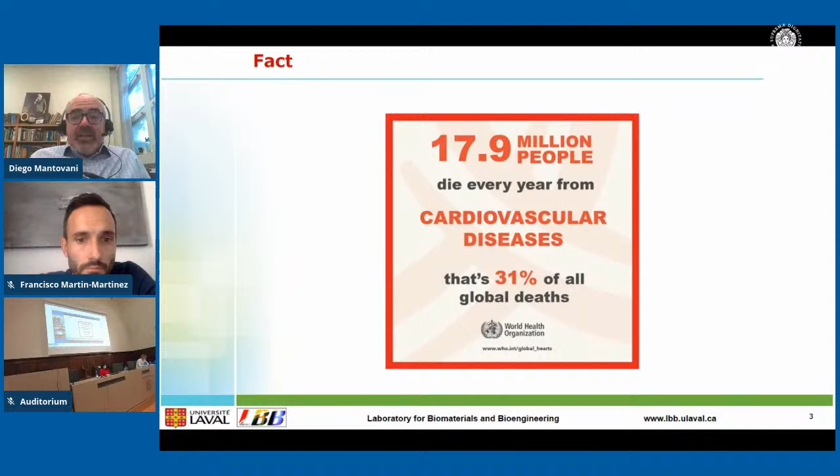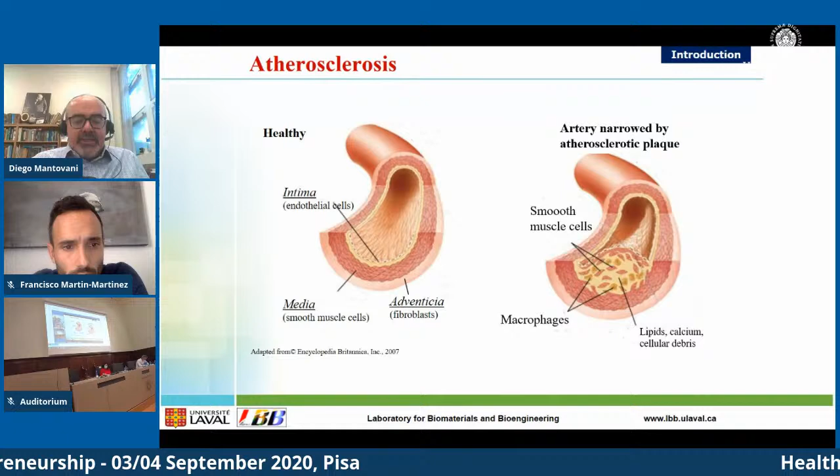Unhappily, aging will bring deterioration and narrowing and the arrival of atherosclerotic plaques. Atherosclerotic plaques are mainly accumulations between the intima and the media, so in the first and second layer of the arteries, of metabolites and especially catabolites. This will induce a rigidification of the arteries and will bring the requirement of pharmacological treatment and later on eventual surgical treatment.

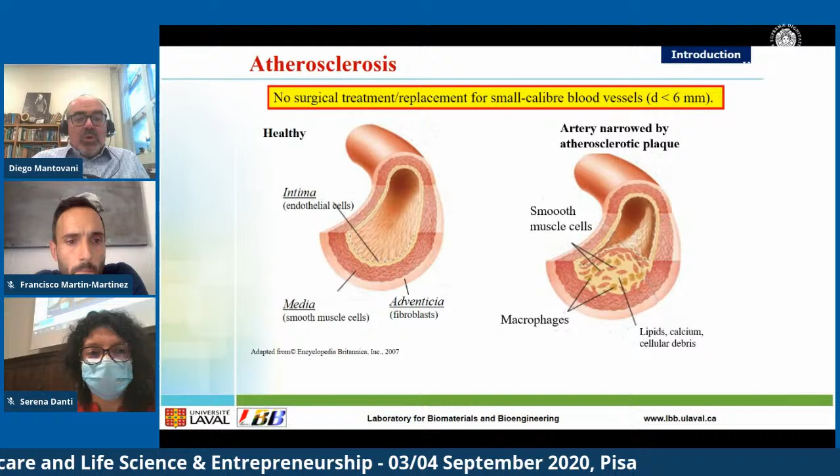It's something that affects roughly 300,000 replacements per year worldwide. So the media is the muscular part of the artery. The intima is, let's say, the moquette and the carpet of the arteries, while the adventitia has more of an anchoring role. So in our lab we address a transversal and converging approach to work from different points of view.

Including biodegradable metals. Our dream for this is to go and correct congenital diseases in newborn babies, even before birth, in order to correct, for example, a vascular or cardiac defect, to limit the progression of atherosclerotic or other problems. We work on regeneration, creating models of vessels and cardiac patches that can be used for validating materials and surfaces that we engineer in our lab.

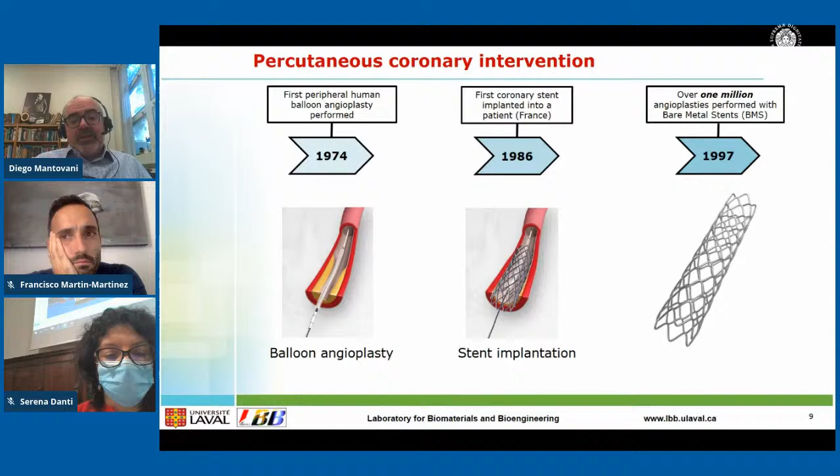Cardiac and vascular stenting is nowadays a very well accepted surgical operation, and the main interest is that it is not run in conventional surgery but intra-arterially, so intravenous, intravascular. However, as I mentioned, there are complications. So basically 1 stent in 3, and in some cases 1 stent in 2, reveal some major injuries at the endothelium after implantation. So there is an inflammatory response to the penetration of the struts inside the wall.

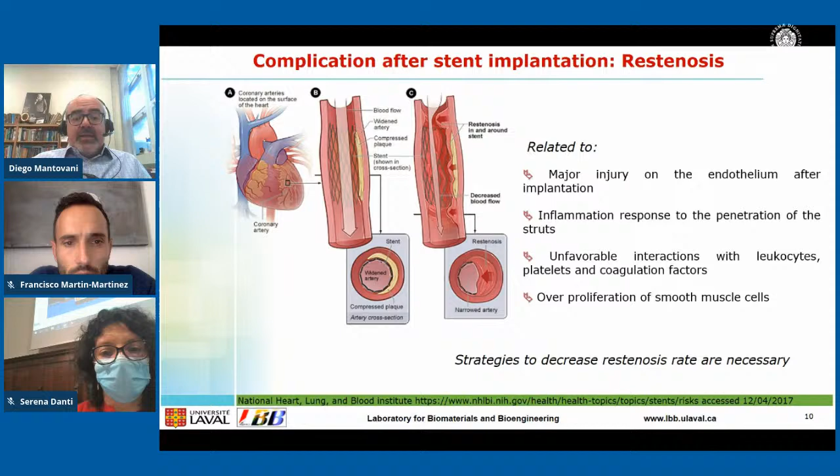As you can see here, the stent, when implanted, will not remain only deposited to the intimal layer, but it will enter and break part of the intima and reach, in general, the media and even sometimes the adventitia. So there is an uncontrolled proliferation of smooth muscle cells called in-stent restenosis. Strategies to decrease this restenosis rate are necessary.

Ten years ago people imagined that just dipping the stent into drugs would have increased the clinical performance rate. But this was not true. The fact of binding to the structures antistenotic molecules like paclitaxel and sirolimus were just big dreams. Today we know that apart from a few cases in a very degenerate vascular bed, meaning very aged patients with a lot of complications and several surgeries already undergone, in general we cannot count on a drug-eluting stent for conventional surgeries.

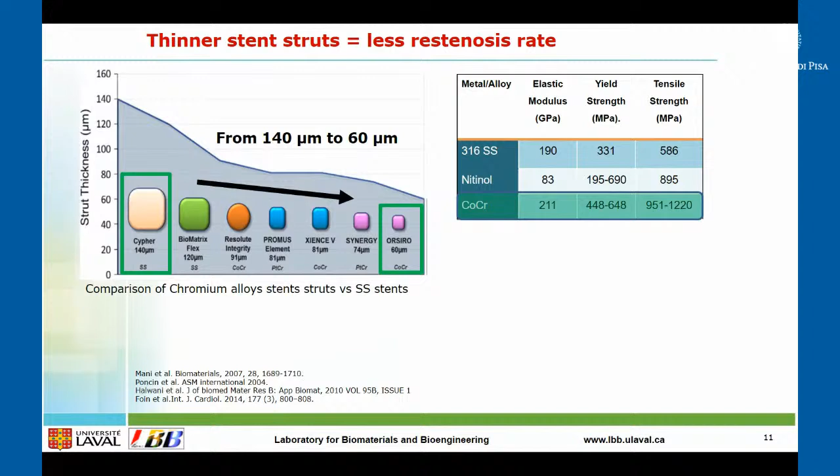So companies, and Abbott is quite innovating in this, decided to explore what happens if we decrease the mass of the stent. Going thinner has become in the last 5 years the main targeted approach. This is also very easy to see in this image where you see the section of the stent going down. The last chrome cobaltum stent is 60 microns in structure. This means if you go down in dimension, in geometry, you need to increase the mechanical properties of the stents. But today, generally, stents are implanted at much less than 140 microns initially planned, and chrome cobaltum is replacing slowly the stainless steel as the gold standard for operation.

However, even with a reduced strut thickness, the restenosis rate decreased from 25 to 15%. This means that one stent of six, one stent of 7, still have a problem. There is also the potential release of cancerogenic ions, nickel and chromium. Chrome cobaltum is an alloy with 30 to 40% chromium.

So drug-eluting stents became a reality around 2005. But by 2015 it was evident that major complications like late in-stent restenosis arrive. In other words, the fact of releasing paclitaxel, sirolimus, and derivatives for years compromises the homeostasis of the entire organism and results in an unbalanced blood coagulation cascade. So the critical compromise in endothelium recovery was due to non-specific drug release, and the idea is how can we improve the performance of the devices.

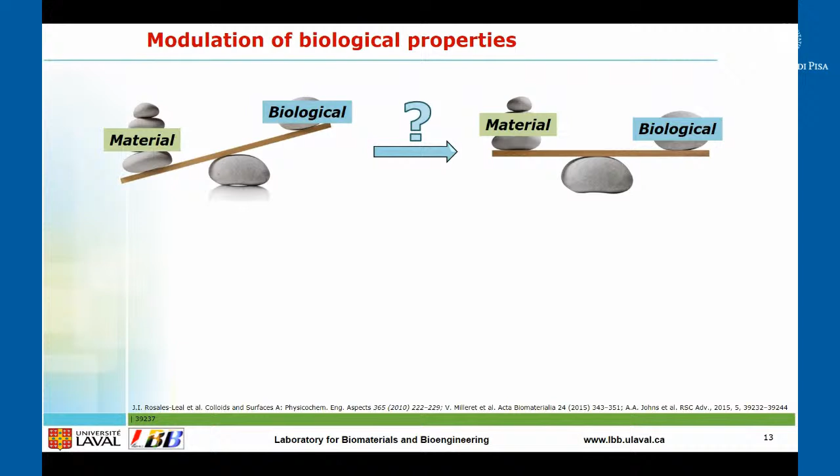This project results from a joint connection between cardiac surgeons in Paris, Abbott Research Division in the US, our lab, and a few other labs in Paris and Belgium. The idea was brought mainly by our cardiac surgeons: let's work on the equilibrium between materials and biology.

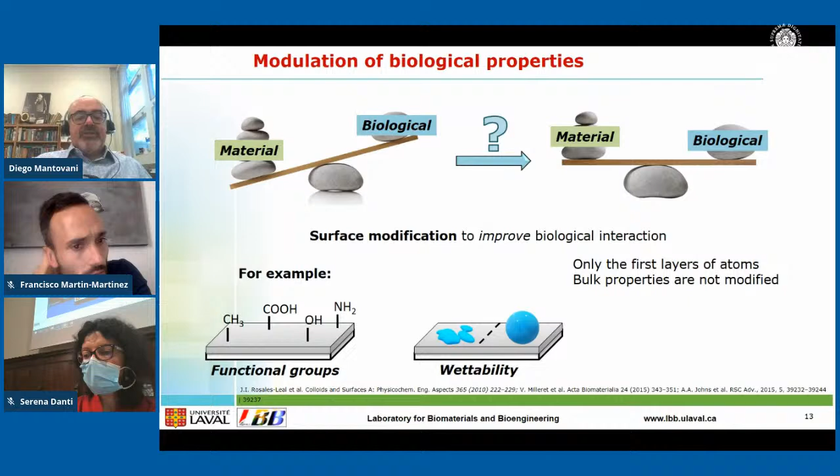Surface modification is a proven, interesting approach to modify the first layer of atoms without touching or disturbing the bulk properties. For example, you can imagine on a surface, generally done with polymers, to functionalize the surface, changing the wettability and finally affecting the surface finishing.

So the clinicians brought these 3 blocks. We need a cardiovascular device. The future stent should be anti-inflammatory, pro-endothelialization, and antithrombotic. So our idea, our solution, was why not graft bioactive molecules to enhance the device integration.

This is not very much different from what our colleagues presented earlier this morning. Very schematically, our approach was to take L605, so chrome cobaltum, medical grade, used for fabrication of millions of stents around the globe in recent years, and deposit a coating, then functionalize the coatings, finally revealing cracks in the coatings when the material is deployed.

So in this project, one of the innovative approaches was to challenge the use of a polymeric layer. If you take, for example, Abbott, they have on the market the Xience stent. This is a stent just coated with a very thin fluorocarbon layer to avoid adhesion and proliferation of smooth muscle cells. In this work, we wanted to bypass, to limit the coating presence.

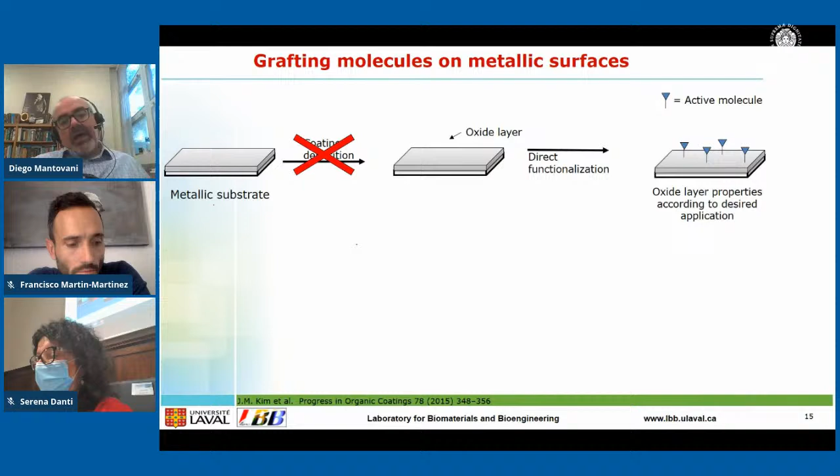Our approach was to explore direct functionalization by plasma, and this turned out to be very original. No one had ever published or reported work on direct functionalization. Direct means taking the metal, putting it in a plasma reactor, and creating functionalization groups by plasma treatment. So depending on the gas used in the plasma, you can fix carboxyl groups, amine groups, or other groups.

So functional groups are to be used as an anchoring point for biomolecule grafting. In our case, in the following of my presentation, I will mainly focus on amine groups. So when you have a surface with amine groups and you want to attach bioactive molecules, in a few moments I will tell you which was the bright idea brought by clinicians for the new bioactive molecules. Then you need different strategies, but mainly linking arms.

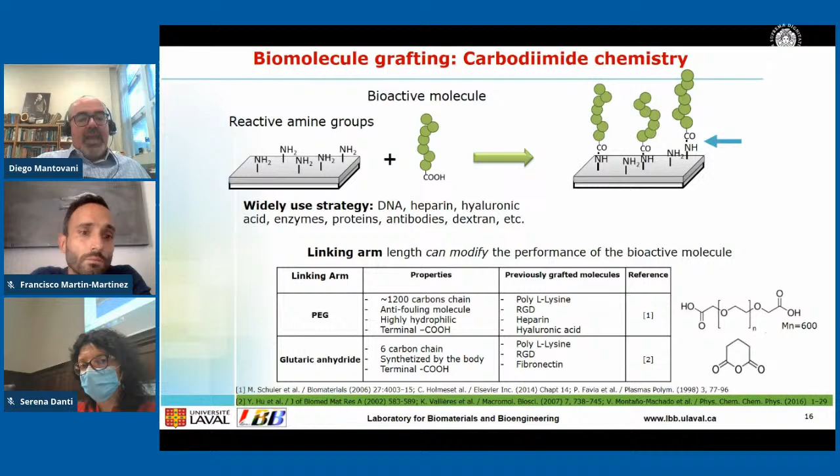So in general, you can see works in the literature with anchoring to functional groups: DNA, heparin, hyaluronic acid, enzymes, proteins, antibodies. Linking arms are used because you can modify the performance of the bioactive molecules, depending on the availability of the molecules to the biological surrounding environment during implantation, leading to different results. In this work, we explored two linking arms: PEG with 1200 carbon chains, and glutaric anhydride with 6 carbon chains. The idea was to let the molecules be available to the bloodstream, to cell colonization, and to extracellular matrix protein interactions.

What I present in this slide mainly came from the clinicians' point of view. They selected a biomolecule of interest, which is in the family of PECAM. These are platelet endothelial cell adhesion molecules, or cluster of differentiation 31. The idea was to focus on these molecules that are very small, because they are 6 to 12 amino acid sequences.

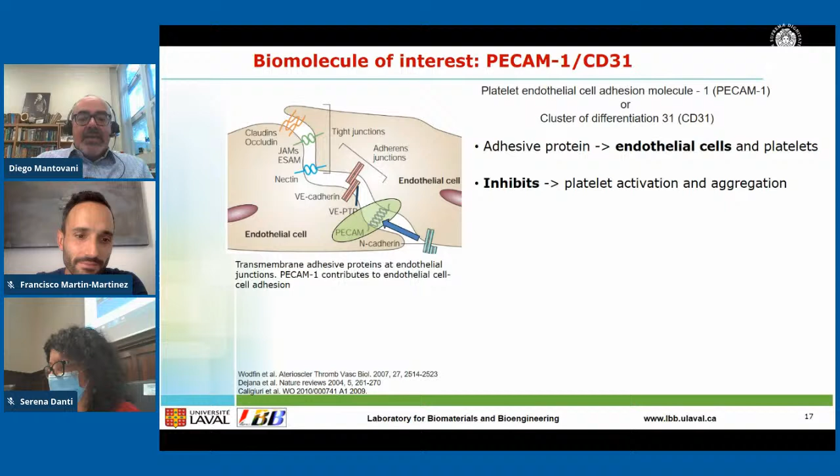So let's say very interesting adhesive proteins, endothelial cell and platelet specific. The idea of this PECAM-1 was to inhibit platelet activity and aggregation, and finally clinicians at Hôpital Bichat in the north of Paris patented a synthetic short chain that they invented, called P8RI. It's a small sequence of 8 amino acids supposed to be responsible for attracting endothelial cells very rapidly to the surface. By grafting these very short peptides, we expect to generate a biomimetic surface to improve chrome cobalt bare metal stent performance.

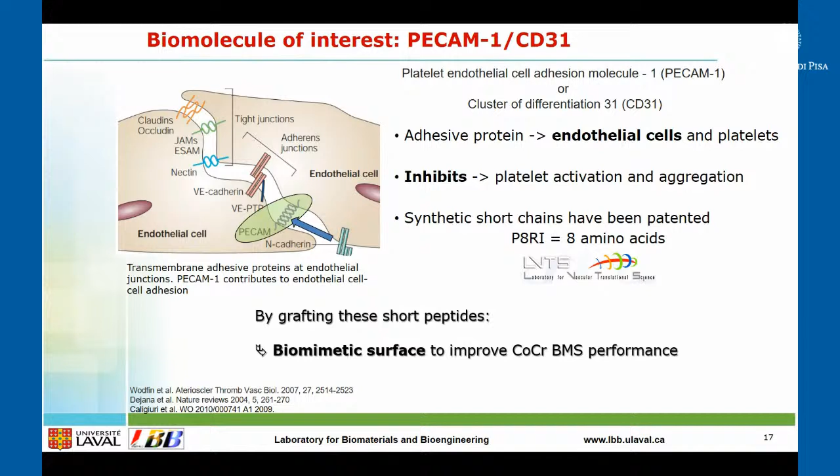So the idea that we developed was: take the stent, modify it in plasma. We had a company develop a very interesting plasma reactor in which you can treat up to 18 stents at the same time, like a revolver bullet support, in the presence of nitrogen-containing gas in order to create amine groups on the surface.

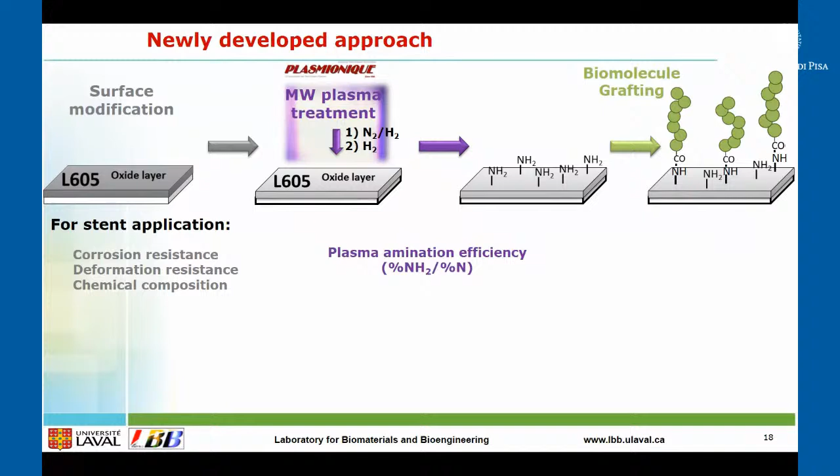So for stent applications, the idea was to achieve corrosion resistance, deformation resistance, and chemically controlled composition. The plasma amination efficiency was the criteria for plasma treatment success, and finally the feasibility to graft molecules with different linking arms, expecting different biological performances, are the three targets expected from the work.

About the feasibility of the approach — this was published a couple of years ago — what is interesting is that, to the best of our knowledge, this is the first time a metal was successfully functionalized in a plasma reactor. Plasmas are generally devoted, especially low vacuum plasmas, mainly to polymers.

Finally, surface optimization — basically this is optimization of the linking arm — and finally the grafting work, now published in Biointerfaces. So the methodology was the following. I'll go fast; if you are interested, I can share the results with you very easily.

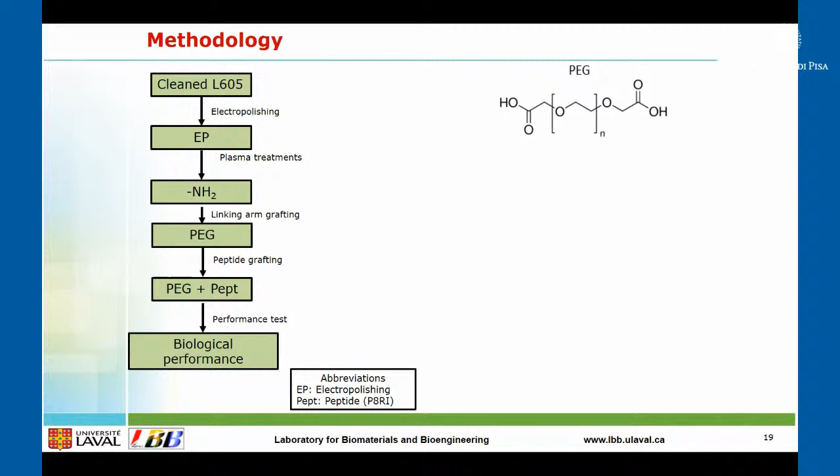The idea was to start with a cleaned stent, electropolish it, and in order to engineer the oxide layer a bit, finally graft amine groups. From the amine groups we explore the PEG and the peptide, then assess the biological performances. The peptide, P8RI, was patented by a company that is now working at clinical level on this project. XPS and high resolution immunostaining fluorescence were used to assess and validate the protocol.

So why polishing? I'll give you a very short history here, but this was two years of research carried out in a teamwork effort, in order to understand: should we remove completely the oxide layer, or how much of the oxide layer should we leave, and what will be the best roughness?

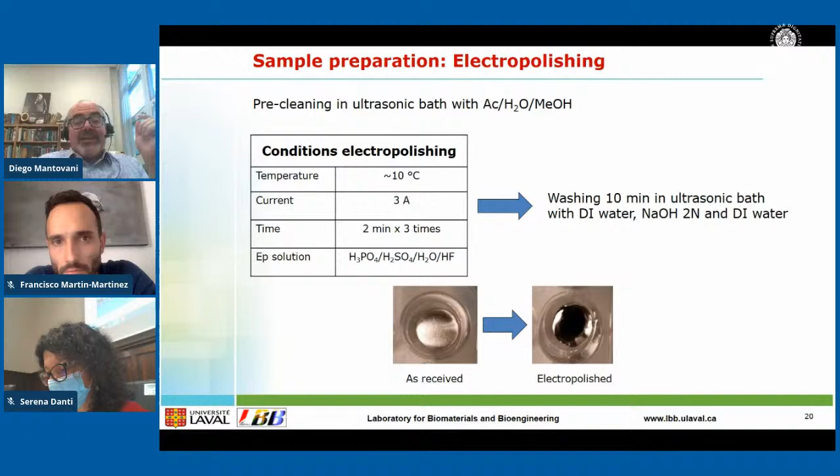One should know that stents for cardiac, vascular, and neurological applications are generally surface treated in order to get a roughness of 4 to 6 nanometers. So the plasma reactor is this one.

The proof of feasibility was done in a conventional plasma reactor, and then a more targeted plasma reactor was developed with 18 stents that can be positioned inside.

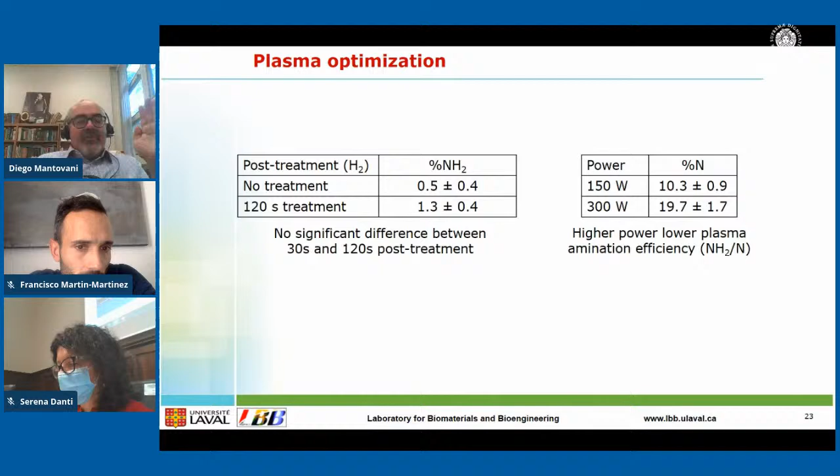Amination was done with a different condition, basically in a post-treatment, and the plasma optimization arrived to a value of 10 to 20% of nitrogen, which results in around 1.5% of amine group. This is more than enough. Don't think that we need 100% of amine group on the surface.

So the homogeneity of the stent functionalization was assessed - the top part, the bottom part, and the central part - and basically this was confirmed.

We used bromine in order to derivatize the amine group presence, and so to be able to assess the aminization capacity of the process.

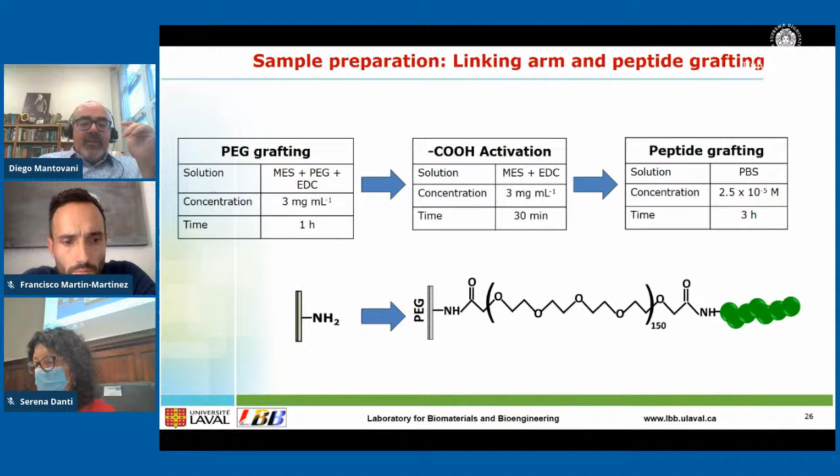Finally, two different linking arms were used for connecting the peptide graft. So this is the PEG long chain, and the glutaric acid was second.

In general, there is no nitrogen after electropolishing. This means that the nitrogen on the surface comes mainly from the plasma treatment.

Finally, the PEG is attached, and the PEG peptide is there. This is an interesting table because you can see the evolution of what you bring to the surface, and you can notice that the oxygen and carbon presence increase during the PEG grafting and the peptide grafting.

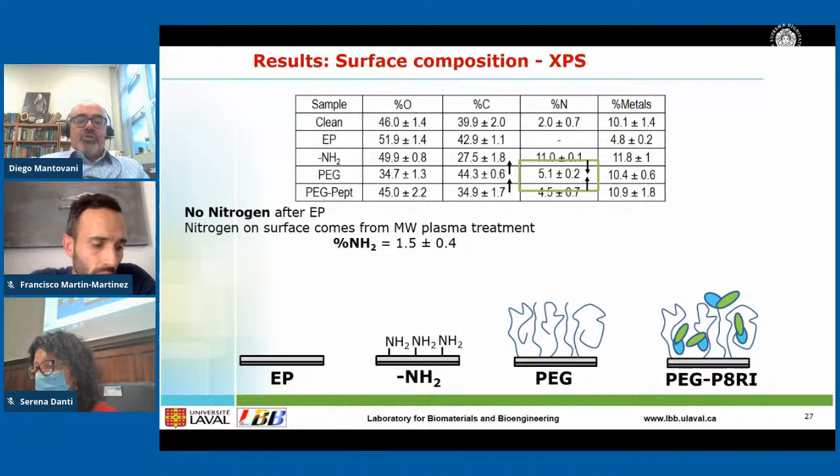What is important is to see that basically 5% of nitrogen was the targeted approach.

Then some in vitro tests in order to assess in the lab, especially with endothelial cells, were carried out. So the phenotype, multiplex analysis of sub-inflammatory factors, and some distribution of endothelial cells by immunocytofluorescence was carried out.

So this is the short chain with glutaric acid, and this is the long chain linking arm with PEG. I think you already captured the potential of both.

And these are the in vitro results of endothelial cell phenotypes. Basically the vascular cell adhesion molecule VCAM1 decreased, and this means it mediates the adhesion of platelets to endothelium, which is very positive for us.

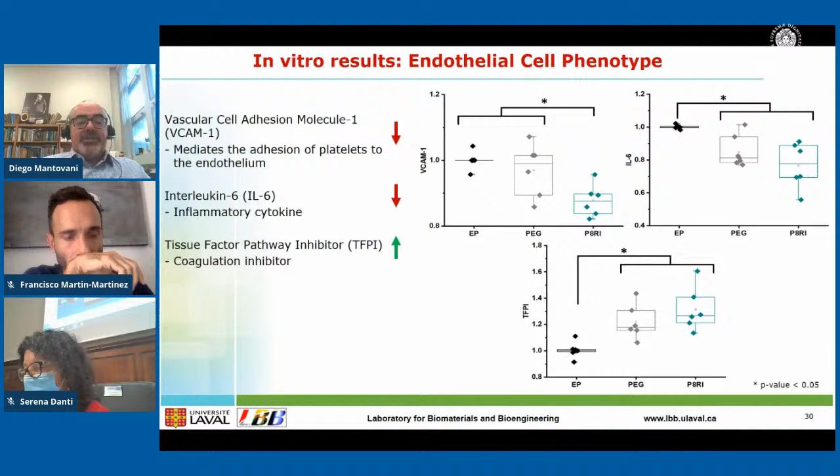Interleukin 6 decreased, meaning basically the surface is less inflammatory, and the tissue factor pathway inhibitor TFPI increased - this is a coagulation inhibitor. These are three factors quite considered by cardiac surgeons.

So in general, the surface after the grafting is more anti-inflammatory and anti-thrombotic than electropolish. So there is a synergistic effect between the PEG and P8RI.

I suspected this before doing the experiment - our expectation was that the more freedom was given to the peptide, the higher would be the biological performance.

This is a result of electropolish, meaning no PEG, no peptide. This is PEG coating, and this is PEG and peptide.

We are looking at endothelial cells at 1, 3, and 7 days. Basically, the P8RI grafting increases endothelial cell viability and anastomotic integrity.

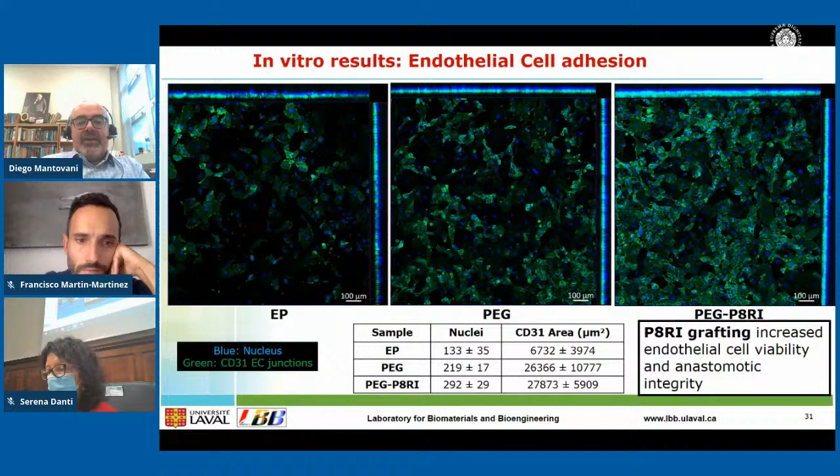And then we transferred this to a commercial cardiovascular device. So 80 stents were provided by Abbott, which was a good partner in this project, and then it started to become a bit more complex, because what I presented to you up to now was done mainly on flat surfaces.

All the processes were optimized on flat surfaces. And now you have in your hands an 80 micron structure stent, 3 centimeters long and 1.7 millimeters in diameter, and when expanded maybe 3.5, so 1.7 to 3.5.

So very tiny devices, very complicated to manipulate. Can you imagine doing XPS? Can you imagine doing contact angle, surface profilometry? Everything becomes more complex. And when the challenge becomes high, you need to use very advanced techniques.

So we went to TOF SIMS imaging, and this is an image obtained on 500 square micrometers and 150, and what you see in yellow is basically the presence of P8RI on the stent structures, because actually Abbott wanted to be convinced that the peptide was really grafted.

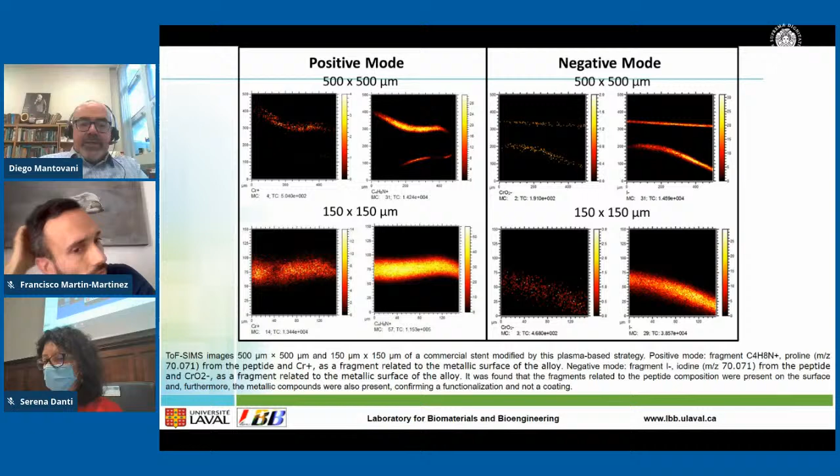This is a positive and negative mode for TOF SIMS imaging of a commercial stent modified by the plasma-based strategy, and you can see in general how clearly the yellow segments show the presence of the peptide.

And then we went in vivo, in a pig model, and we compared 3 stents: Multilink, which is a bare metal stent with nothing attached; Xience, which is a drug-eluting stent coated with fluorocarbon and grafted with everolimus; and finally a PEG P8RI stent.

This was a very interesting approach, and I wanted to spend a minute on this. When you test a new strategy like the PEG P8RI grafting molecules without acid and no wet chemistry, then you really need to find the positive control and negative control.

And basically this is something that a clinician will not test - a new device, a new strategy, without comparing with what exists and what they use, and basically what they know works well and what they know works less well.

Bare metal stent today for a middle-aged patient is considered the gold standard for rapid endothelialization. Drug-eluting stent, for the same patient, is considered a negative control: no stenosis within 6 months, but after 10 years, completely unbalanced hemostasis. So comparing a bare metal stent that doesn't have any peptides, molecules, or delivery system, with a drug-eluting stent that does release a drug, we know that at medium term, 5 to 10 years, complications will arise.

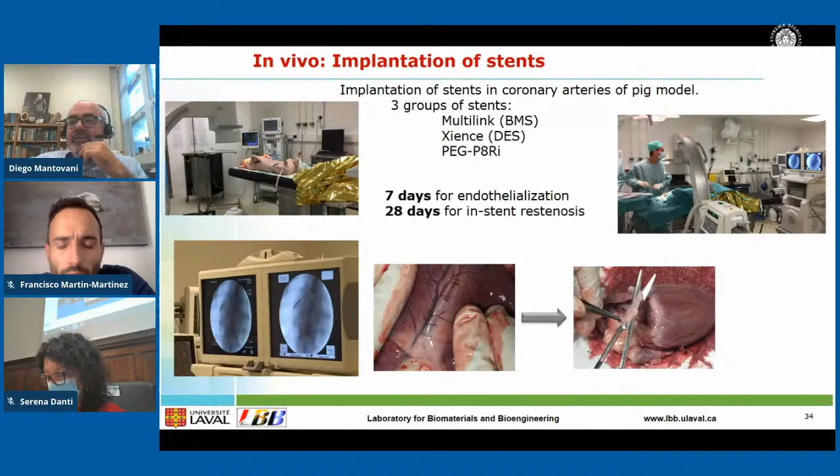This is the stent once implanted in a pig, and this is during explantation, and finally we collect materials for further analysis.

And this is the very interesting results. You have a bare metal stent, a drug-eluting stent, and here the peptide-grafted stent. Let's look at this endothelialization at 7 days, and this is an OCT image of the stented artery showing how patent it remains right after.

Clinicians were very interested because of the very high endothelialization on this stent compared to drug-eluting stent. Drug-eluting stents, we know, have slow endothelialization, but bare metal stent is supposed to be fast, though there is some presence of coagulation.

Here on the peptide, you just see endothelial cells and basically some platelets, but not activated—here they are not spread. And the presence of the eluting drug, everolimus, shows that here too.

So the peptide generates the same response as a drug-eluting stent, but with the rapid endothelialization generally observed with a bare metal stent.

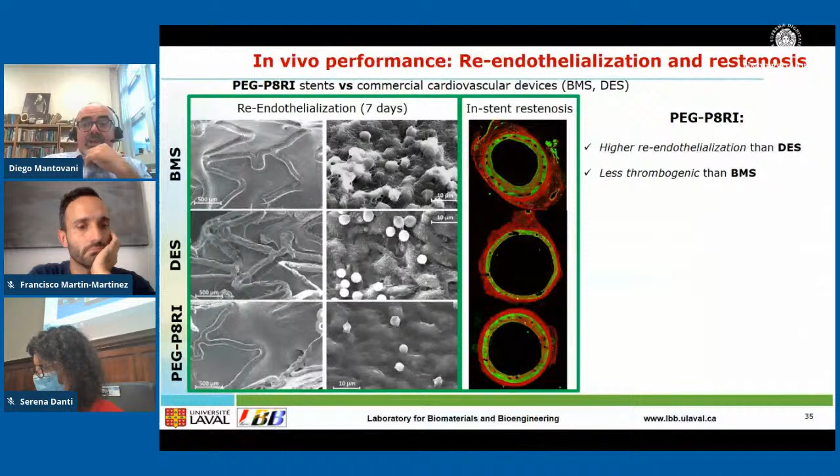This is an OCT image showing the patency, and you see that for drug-eluting stent it's not bad at all, but the best is really for the peptide-coated stent, showing less in-stent restenosis compared to bare metal stent.

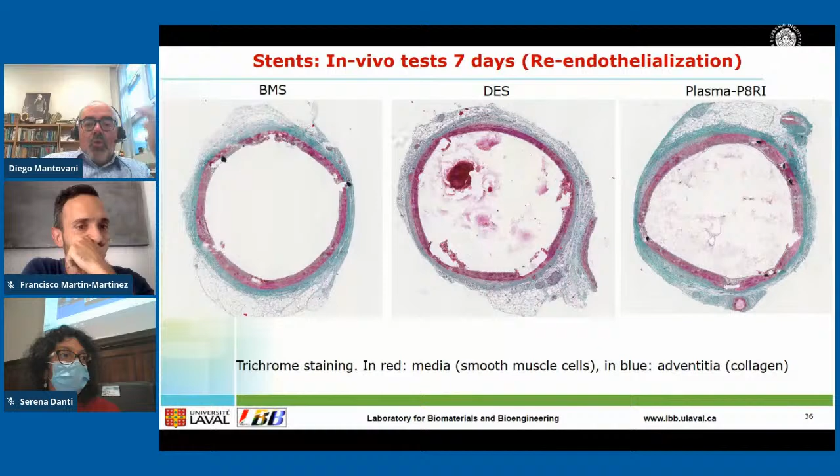And this is the in vivo test 7 days after. You can see bare metal stent has basically no coagulation, some coagulation here in drug-eluting stent, and finally the plasma peptide-coated stent is quite clean. So in conclusion, surface modification can improve biological performance without compromising material properties.

The best amination efficiency was observed while maintaining corrosion and deformation resistance.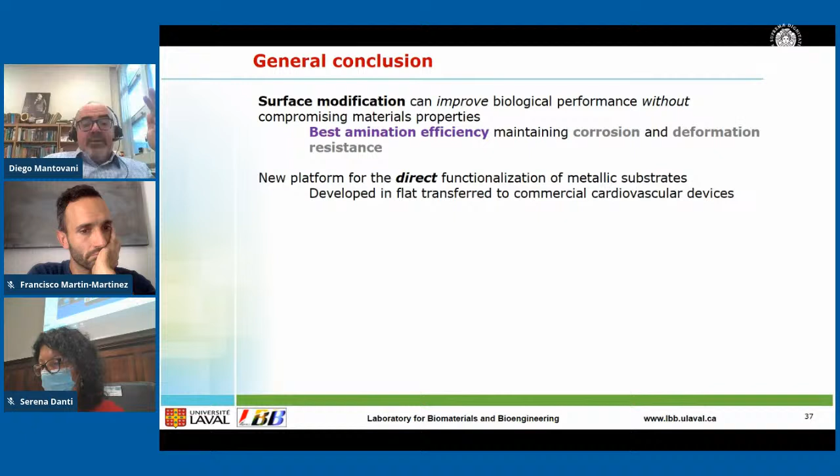This developed a new platform for the direct functionalization of metallic substrates, and the development was transferred in a flat format to commercial cardiovascular devices and stents. This plasma-based strategy, when coupled with CD31 peptides, improved both in vitro and in vivo biological performances.

And when compared to commercial cardiovascular devices, this peptide strategy includes higher re-endothelialization than drug-eluting stents and antithrombotic activity, especially compared to bare metal stent, and finally a decrease in stent restenosis when compared to bare metal stent.

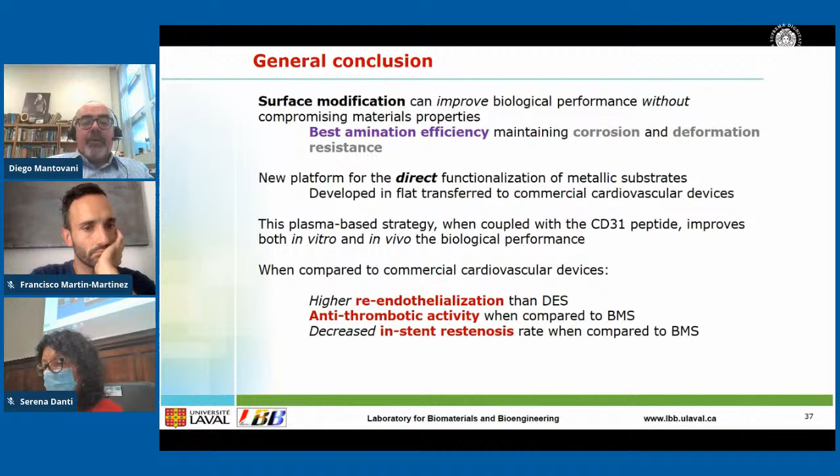Today, this project is under development, and Abbott invested in a small spin-off with 12 people working on it, carrying out longer animal studies and starting preclinical analysis. So we have a good expectation that in 2-3 years, this project and these results will arrive at a product on the market.

A number of activities are ongoing transversally, including transferring these peptide grafting techniques to balloon angioplasty, for example, or other metallic devices. Two of our past PhD students are now involved in the companies, and this is also an interesting result for professors like me.

Clinicians are very excited to have been introduced to TOF-SIMS and this kind of analysis, while companies are generally really prudent with this kind of work and project.

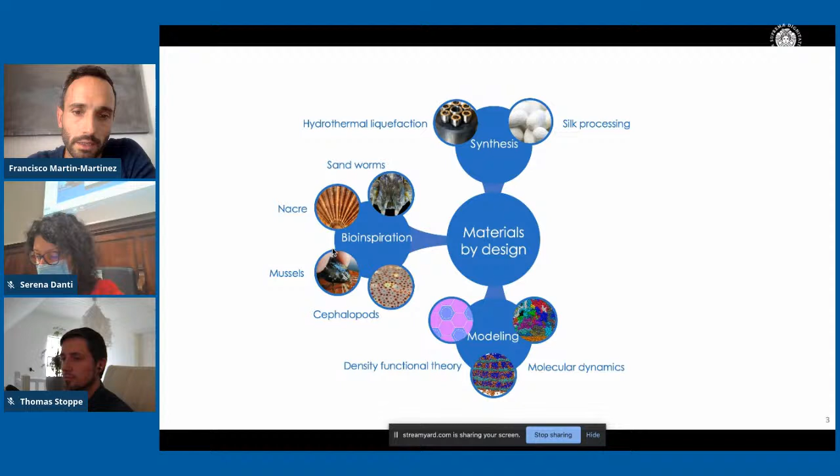In particular, I've worked with hydrothermal liquefaction of biomass, but also with silk processing. And there is something in common to all these things, which is that we always have some kind of bio-inspiration. We try to mimic nature, because at the end of the day, any material, any technology we can develop has already been thought and developed by nature. The first thing we need to do is learn from nature how to solve that challenge.

And then that, of course, applies to different applications. I'm going to talk about some of them connected to nanocomposites, soft robotics, or redox flow, vanadium redox flow batteries.

So let's focus now on this part of the modeling within materials by design. The challenge with modeling comes basically because of the length scale and time scale when you are modeling materials. That implies some implicit limitations that make us work either in the quantum mechanics field, in which we can indeed include electrons in our calculations and describe the system very appropriately, but in that scenario we cannot afford very large systems, and the time scales are also very short.

We can then go also into molecular dynamics. Basically, what we do is forget about the electrons, and then we say, all right, I'm going to consider that my atoms are just spheres that are interacting with another sphere through some kind of potential, which is called a force field. So this very simplistic, more classical approach to the description of molecules and materials is what we do for molecular dynamics—still very accurate, still atomistic, in which we can now afford a bit larger systems.

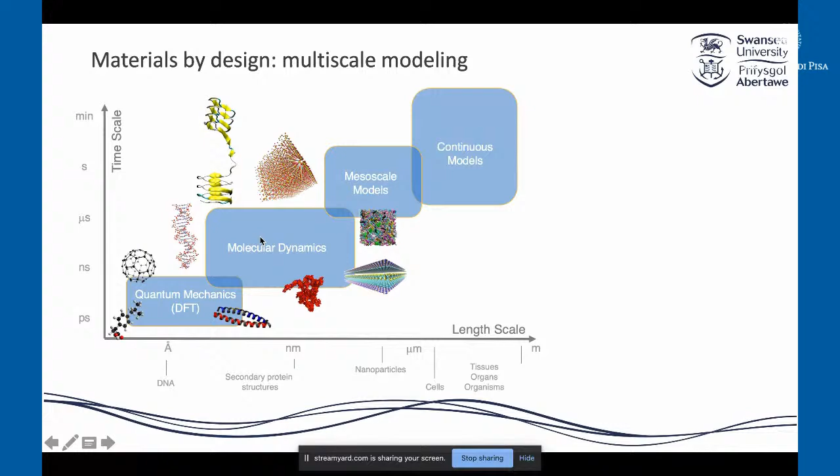This is very commonly used for the design of proteins, for larger scale nanomaterials, even for concrete, asphalt, and materials of this scale. Now there are, of course, some other modeling approaches at different scales, mostly continuous models when we work with finite elements—I have not worked on that scale. The biggest challenge in between these continuous finite element models and atomistic modeling is this mesoscale, which is some kind of frontier where we are still working on how to bridge this gap into the models. And now what I'm mostly interested in is how we can accelerate all of this by using machine learning techniques.

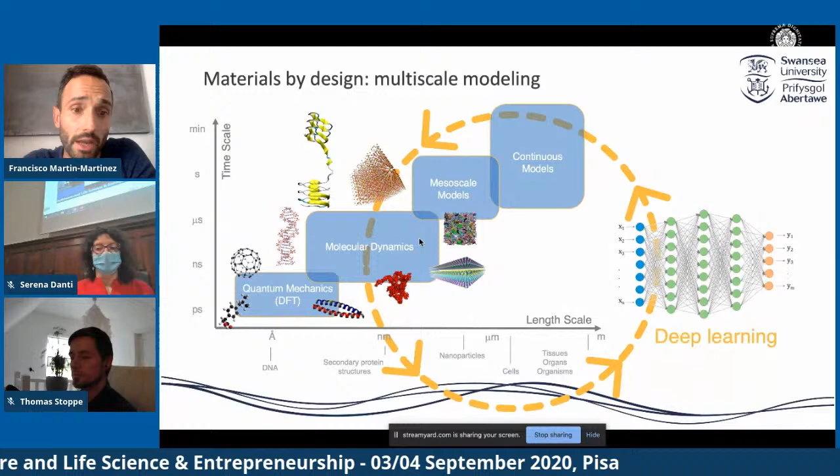So how can we use deep learning to speed up simulations in molecular dynamics, as well as electronic structure calculations in quantum mechanics. That, of course, isn't something you do on your laptop. We mostly work with Supercomputing Wales, the supercomputing center of Wales, of which Swansea is one of the partners, as well as with Google Cloud, where we can perform these calculations not on our own hardware, but in the cloud with Google.

Now the other part is inspiration. By inspiration, I mean while I was at MIT I worked on different projects with many people, trying to mimic nature to produce, for instance, better adhesives, mimicking how mussel threads adhere to stones in many different circumstances. To achieve that, we mimicked the catechol-rich proteins, modeling a polydopamine catechol-enhanced polymer that has very good adhesive properties.

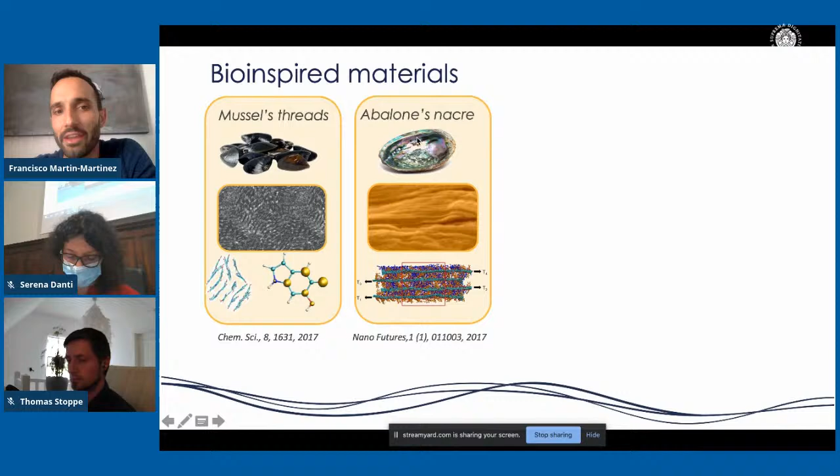We then used that polydopamine to produce a graphene oxide polydopamine composite, increasing the mechanical performance of graphene oxide paper by mimicking the structure of nacre from abalone seashells. So these are two examples of bio-inspired materials.

We also worked on mimicking and producing materials that shrink or expand upon changes in pH or temperature, mimicking a protein found in the jaw of this beautiful sea worm, Nereis virens. We did modeling to capture the coordination of metals with different terminations in the protein, and also to mimic the camouflage properties of cuttlefish or octopus skin, where proteins produce both structural colors and pigmentary colors.

But there is something in common among all these things I did while at MIT: all these materials are designed for performance, which is great—that was the purpose, and that's what we were looking for. However, in my opinion, this bio-inspiration goes another way.

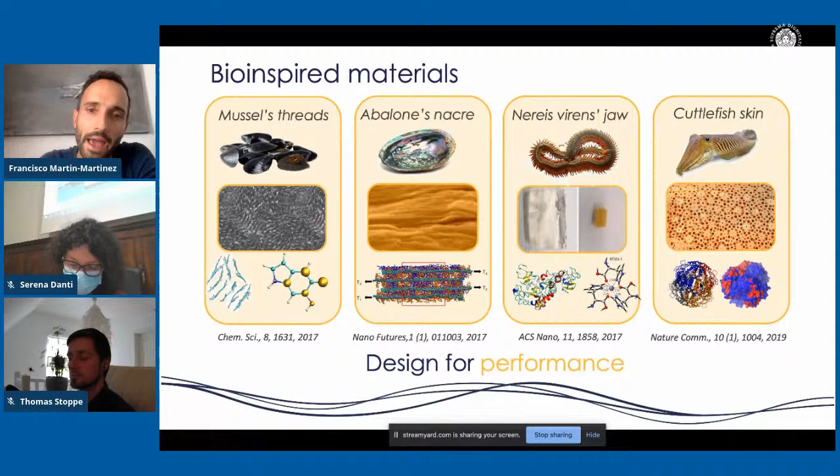If you think, for instance, of other natural materials like wood—and this applies to any material in nature—these are materials that are complex. They help mitigate climate change, they absorb solar energy, they are mechanically very strong and stable, they are light, but they also have ways of turning back into the material cycle, so you get the material back again.

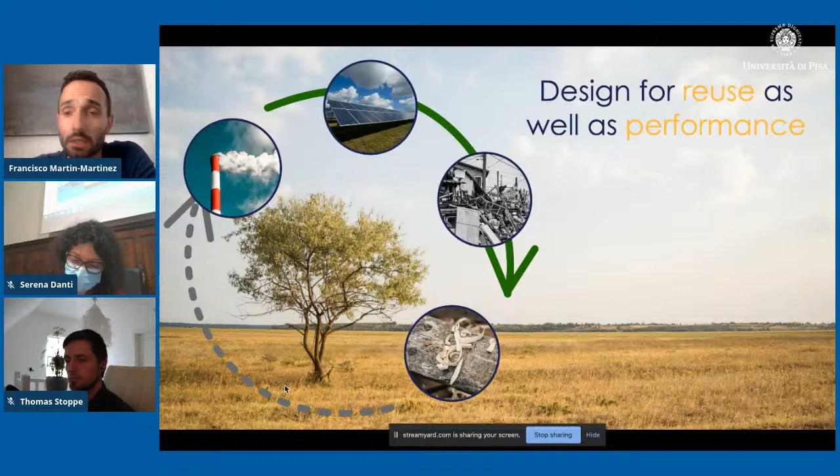So if you think about the overall picture, bio-inspiration is not only about designing materials for performance, but the interesting part, where I'm moving now, is how to design for reuse as well as performance. That goes into the idea of circularity, circular economy, and how to actually create these circular materials.

So my particular vision now is: how do we integrate different building blocks that assemble into a complex material, but design that material in such a way that we already know how it's going to deconstruct back to the initial building blocks? Of course, that's ambitious, and it's a very big picture.

So what I'm doing now, and what I also studied at MIT, is putting together some of the pieces needed for that. I'm focused on how to create these building blocks out of biomass, how to not only incorporate biomass as a building block, but also transform that biomass through hydrothermal processing into different types of carbon nanomaterials, and how we take building blocks for those nanomaterials too. All of that, of course, is always driven toward different applications.

I'm basically focusing nowadays on energy storage, bioasphalt, precision agriculture, and also biomedicine. But at the end of the day, the good thing is that you have a playground—multi-scale modeling and machine learning algorithms—where you can tune your material to any application you might think of.

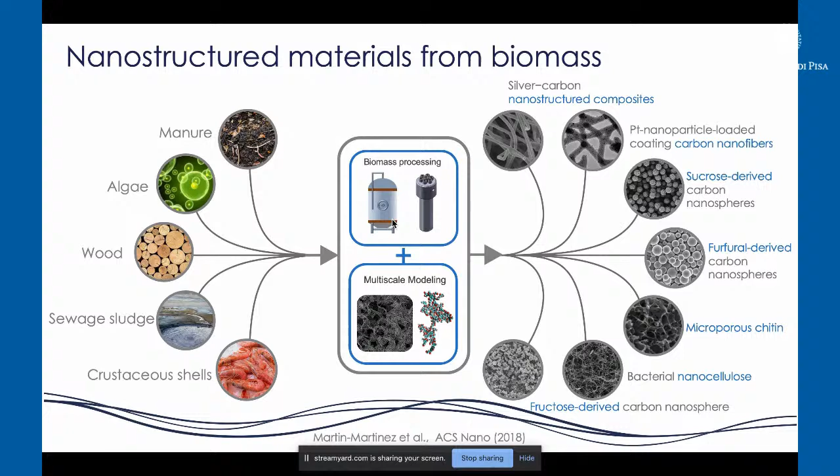So connecting to that part of biomass, it's basically about how we explore all the different types of biomass, and how we process and model those to create different types of nanomaterials. Some of these are already available, but there's still plenty of room to improve, design, and synthesize these kinds of nanomaterials, or bio-based nanomaterials.

So, just to give you two examples of the projects in which I worked at MIT, basically we started processing different types of biomass: wood, chitin, and sewage sludge from wastewater treatment.

We apply this hydrothermal processing, high temperature and high pressure. So water is in subcritical state, so it behaves more like a solvent, more like an organic solvent, that helps degradation of biomass and repolymerization.

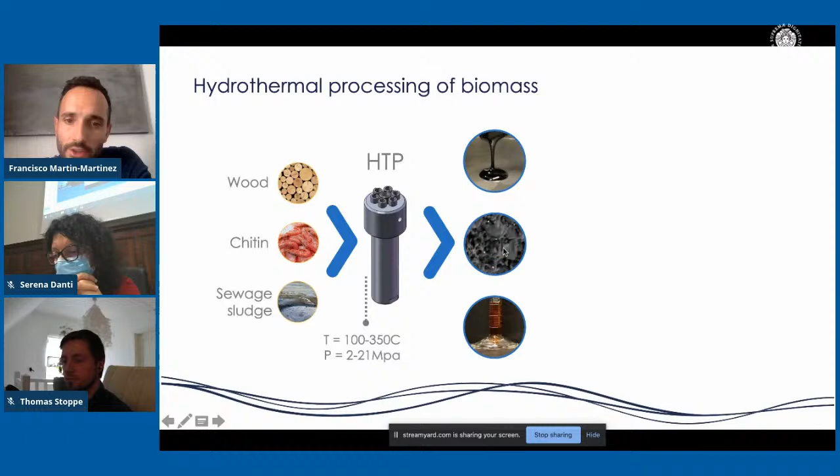Then depending on the conditions, you get mostly three different types of materials: one is biocrude oil, a solid nanostructured carbon, and a solution where you have carbon nanoparticles. So the challenge now for us is actually to model these three, which is what I'm working on right now, and how to help improve the processing using the models created in this step.

So just as an example, by using chitin from shrimp shells and doing this hydrothermal processing, we can create nitrogen- and oxygen-doped bio-based carbon, with the nitrogen and oxygen coming from the original chitin. We use this carbon to decorate some felt electrodes, and then apply those felt electrodes into vanadium redox flow batteries. Basically, what we see is that this nitrogen and oxygen facilitate the absorption of vanadium, and that improves the kinetics.

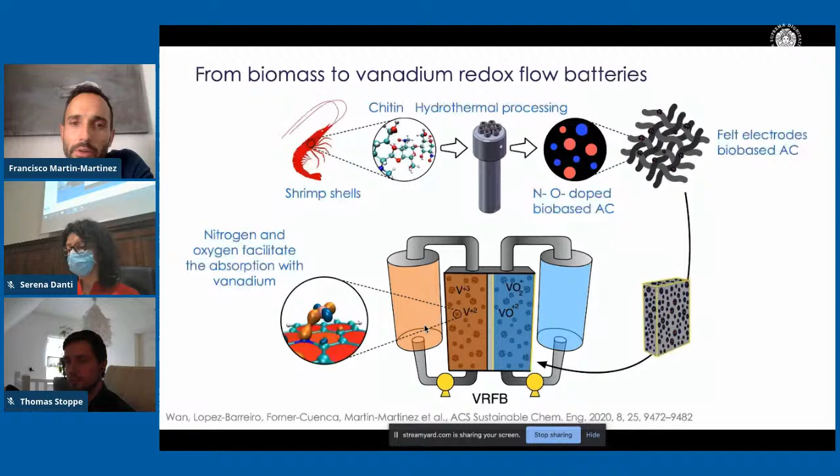You can see here the chitin-derived activated carbon in the electrode has an electrochemical active surface that is reasonably higher than that of carbon black, taken as a comparison. It also has higher wettability, as you can see from the contact angle of the bio-based carbon from chitin compared to carbon black.

When it comes to cyclic voltammetry, you can see how the actual kinetics for both couples, the 2,3 and 4,5 for vanadium, both have better kinetics than carbon black, and also better than those coming from wood.

Doing the modeling, what we saw is that for vanadium 3 or 2, all the species with nitrogen have a higher binding energy than those species which bind only to carbon. So nitrogen indeed improves the absorption of that vanadium species, and that helps improve the kinetics.

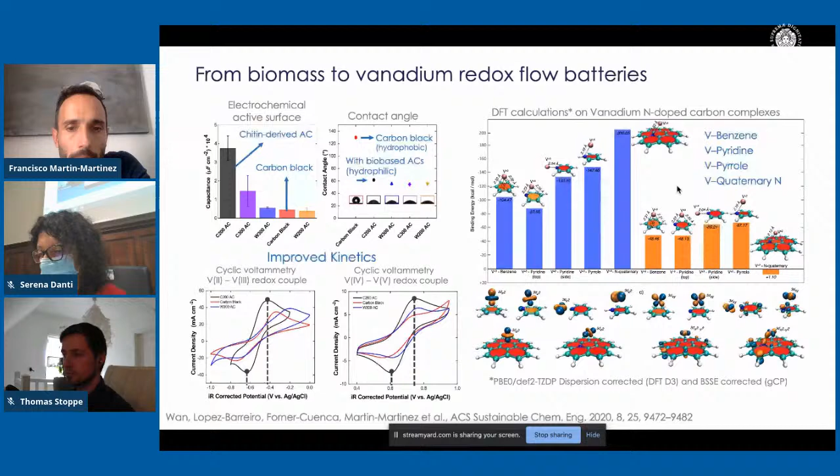The other project I wanted to comment on was how to combine these bio-based materials with biomaterials, to create conductive films that are biocompatible but also conductive. So what we did is process silk coming from silk cocoons. We extract the silk fibroin, and we have a process to create a solution of this silk fibroin, into which we put different types of carbon particles coming from biomass.

So basically we explore wood-based carbons and chitin-based ones. When you put all these in the solution, we also add calcium chloride to control humidity and water absorption of the membranes. We can produce these silk membranes with bio-based carbon embedded.

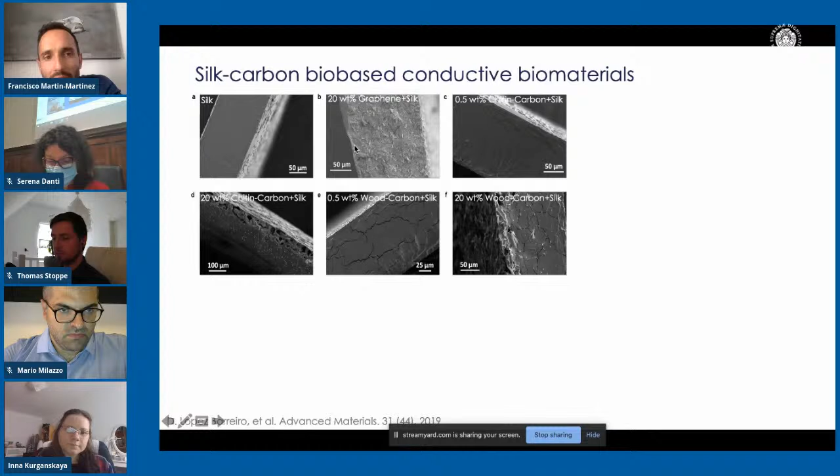Thanks to the nitrogen, it also integrates very well with silk, which is something that doesn't happen with graphene. It was observed with graphene oxide, but not with graphene.

So these are two of the examples I'm working on right now, following up in Swansea.

So just to finalize, I think we were running late, so I'm good with time now. Again, these are two examples of how to move forward in the use of bio-based materials. The big picture idea is how to make those circular — not only to reintegrate bio-based materials, but to design them so they can go back into something we can reuse.

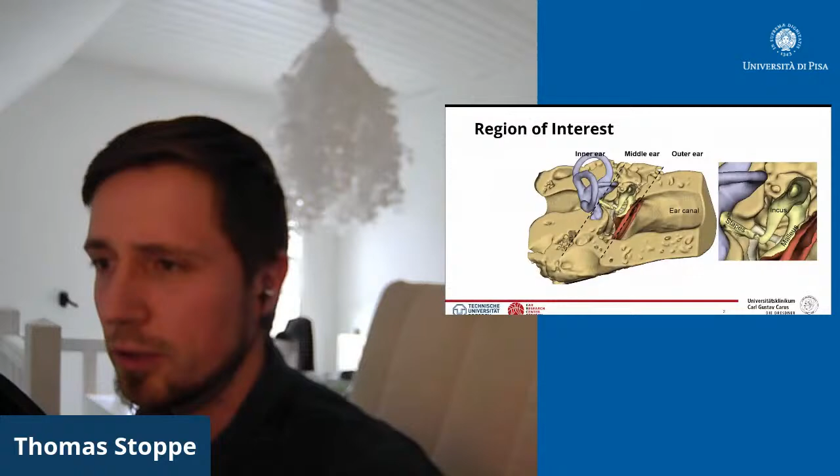Yeah, I wanted to talk about trends in surgical therapy and diagnosis of middle ear diseases. I was asked to focus a little bit more on computation, so I switched topics a little bit with respect to the abstract. But let me first introduce you to the region of interest.

We heard it sometimes before during this workshop. I'm focusing, or our research is focusing, on the middle ear, which connects the inner ear on the left and the outer ear on the right side. A little introduction to the function: if you've got the dynamic sound pressure coming into the ear canal, it is collected by the tympanic membrane, shown in red here. The tympanic membrane then excites this dynamic vibration in air into mechanical motion of the 3 ossicles. I have a magnified image here on the right side.

So the tympanic membrane is red, then the malleus, then the incus, and then the stapes, which is connected with the footplate on the very left to the cochlea in a bluish or violet color. There's vibration here, this arrow, which we're focusing on in our research.

I want to give you two examples for reconstruction of the middle ear or the tympanic membrane to give a little overview about what's coming afterwards, which I want to focus on.

First, reconstruction of the ossicular chain. So here again, the three ossicles, the stapes, the incus, the malleus, and the tympanic membrane. This is an intact middle ear. If there are chronic diseases or damaging pathological changes like trauma destroying this ossicular chain, the vibration is interrupted. At the moment we're using rigid reconstructions. For example, here we have a titanium prosthesis connecting the tympanic membrane to the stapes with another small joint, so that vibration can happen.

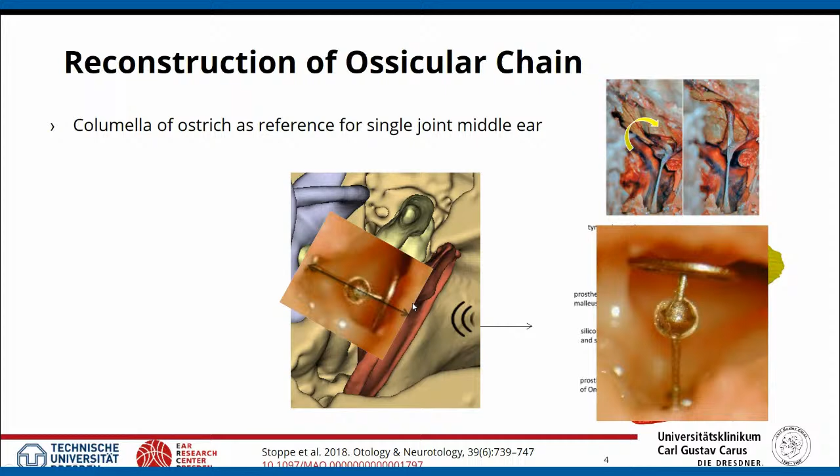So we developed a silicone-coated ball and socket joint to reconstruct this middle ear with a joint prosthesis, which looks like this in a human middle ear preparation. And if you want to look at the 3D image before, it looks like this. Now we have sound transmission in the same quality as a rigid prosthesis, but we also have the flexibility of an additional joint, which isn't the solution for all the problems, but at least it's a good direction to keep going on.

So another thing we are researching is the tympanic membrane reconstruction. Shivish Anand mentioned it before, and other colleagues, mostly from Pisa I think, mentioned during this workshop the 4NanoEARDRM project. So if we got, again, chronic diseases which are not healing spontaneously, like small defects, for example, which are healing spontaneously on their own.

For example here, if it's a chronic disease, then it needs to be reconstructed with autologous tissue at the moment, like cartilage or fascia or perichondrium. As you can see, it's not one single patch - there are multiple patches to keep the stability, but also the flexibility for the patient, so that he can hear properly again, and that the reconstruction won't get destroyed after the surgery.

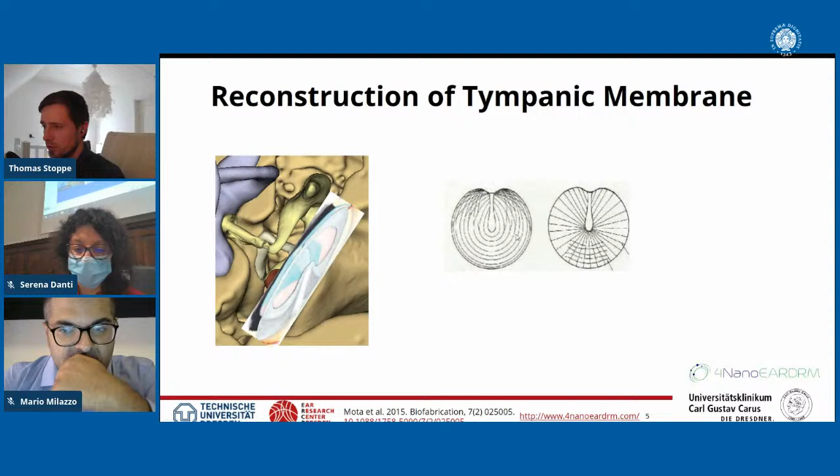I think it was also meant for the complex structure of the tympanic membrane, which is basically inside the collagen layers or collagen fibers. There are radial and circumferential fibers, with different connections and interconnections between each other, and it can be reconstructed with these patches here on the left side using other tissues.

That's why we are focusing on a combined approach of fiber deposition and electrospinning with the guys from Maastricht University, the MERLN Institute, to create, on the right side, such biomimicking scaffolds with circular and radial fibers.

Here in a big picture, and there are two other scaffolds which we have investigated for determining the results of the radial and the circumferential fibers. I'm not going to show these results here, as Shivesh asks, because I was shifting the focus a little bit, as I mentioned before.

But I can say we have a pretty good sound transfer function of these scaffolds in comparison to the tympanic membranes, in the range of about 200 to 400 hertz with the first resonance frequency, and about 10 to 15 dB higher magnitude. But we can talk about this in detail if you maybe email me afterwards or ask a question afterwards.

Okay, so coming back to the presentation, the topic was about trends, to give a little broad overview about the middle ear research.

There are common trends like digitalization, individualization, bioprinting, rapid prototyping, virtual and augmented reality, artificial intelligence, robotics, higher integration, miniaturization, and lots of new materials, which you guys are more experts in than me. These trends can address the unmet needs for otology, with focus on the middle ear during my presentation here.

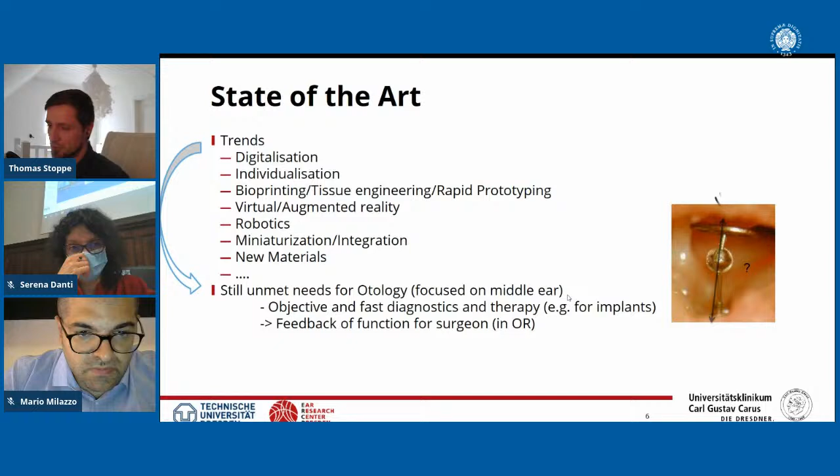If we go back to the example with the ossicular chain reconstruction with the titanium prosthesis, the surgeon reconstructs the ossicular chain and the prosthesis is in position, but the surgeon doesn't know how it will work out in the end. He has to wait until the healing process is finished, and then he can do audiological measurements and compare to the previous measurements before surgery. So that's still an unmet need.

The main target would be to get a complete new middle ear, for example a full biomimicking reconstruction of the ossicular chain and tympanic membrane, or the inner ear if you go further into the hearing organ. That's still the goal here. And of course, at least for Germany, we need a low price for the treatment, which is not easy to achieve, as medical certifications and so on are getting more and more expensive.

Okay, so I was talking about computation. Now I'm getting to the topics of this introduction. I want to show you two examples, one more basic research and one application. Basic research will be about the middle ear morphology, about shape analysis, which is relevant if you don't have an individualized implant. If you can't get 3D data, then you need a prosthesis which can fit multiple patients, but probably not all patients. The other example would be diagnostics.

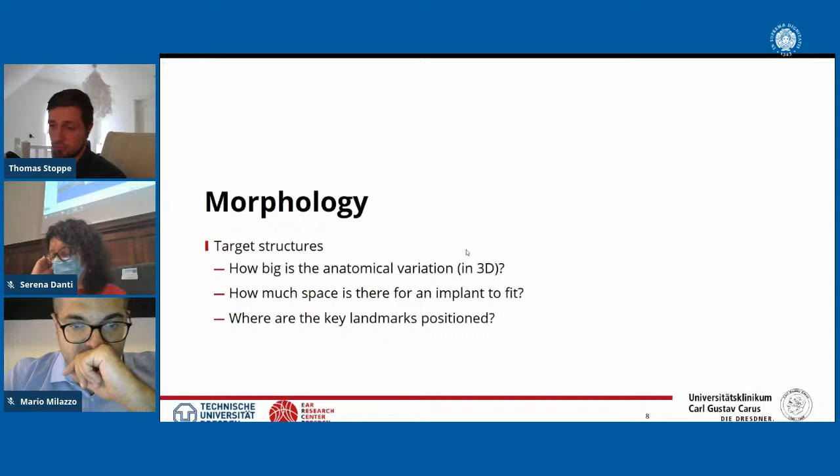So let's talk about morphology. If you've got an implant, you need to know how big the anatomical variation of your target structure is. For example, for the prosthesis, how big or how long can it be, in 3 dimensions. How much space is there for the implant to fit, or to have a certain amount of movement possibilities, and where are the key landmarks of the different patients, of the anatomical variation.

So talking about computation, we took 20 micro-CT data sets to build a statistical shape model, to get the variation of the middle ear, of the ossicular chain from the human middle ear. We were vectorizing the variation of the human middle ear morphology this way. And at the end, we want to use this model to investigate the influence on the middle ear sound transfer function in a simulation model.

So, for example, you have 10 stapes, and as you can see, there's a bigger variation. The length, the height can be different, the width too. There can be certain angles of the crura, the two legs here, and the space between them can be different. There are a lot of shape variations.

The same with the 3 ossicles in combination here on the right side. As you can see, the length of the malleus, for example, can be different, and the position of the stapes footplate here in bluish color relative to the malleus can be different. The angles can be different, and the rotation between the malleus and incus, for example, can vary greatly.

So we took these micro-CT data sets. Of course, we didn't only have 20 - I think we have double the amount, because not all the data sets could be used.

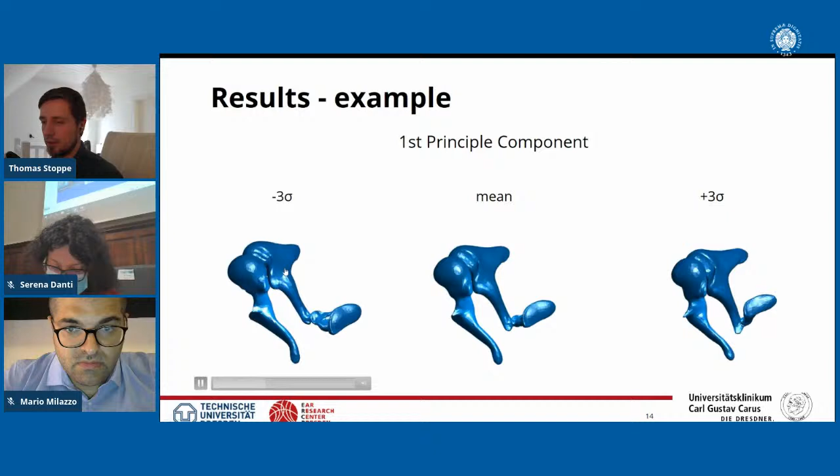This shows the angle of the stapes to the incus process, and a rotation between the malleus head and the incus. We can use this as a statistical model for the simulation in middle ear transfer function, to later on get the vibration in different patients and with different implants, for example.

Okay, going forth to diagnostics real quickly. I was talking about optical coherence tomography, and we integrated this into an endoscope to get a combination of 3D imaging - the morphology - and also the functional measurements.

Optical coherence tomography, or OCT, can look through tissue if it's not too thick or too dense. So we can look through the tympanic membrane and see what's behind, and also get the functional vibration, which I will show you in a second.

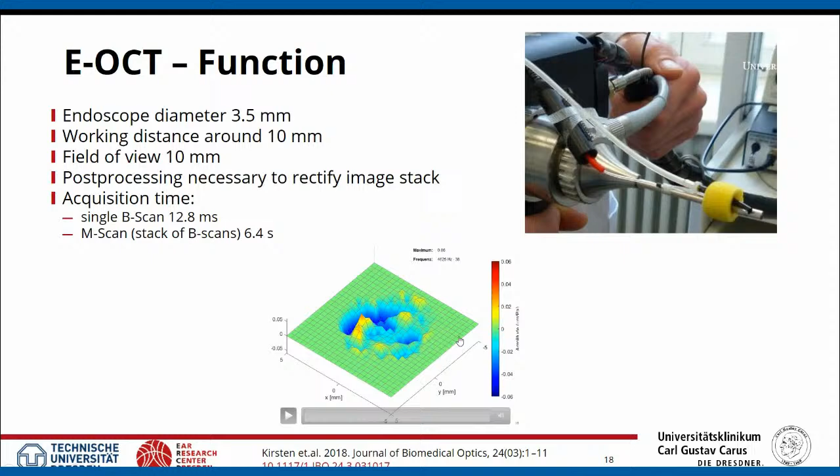So you don't need multiple diagnostic steps for the patient, but just this one tool to determine if there's fluid behind the ear and maybe what kind of fluid.

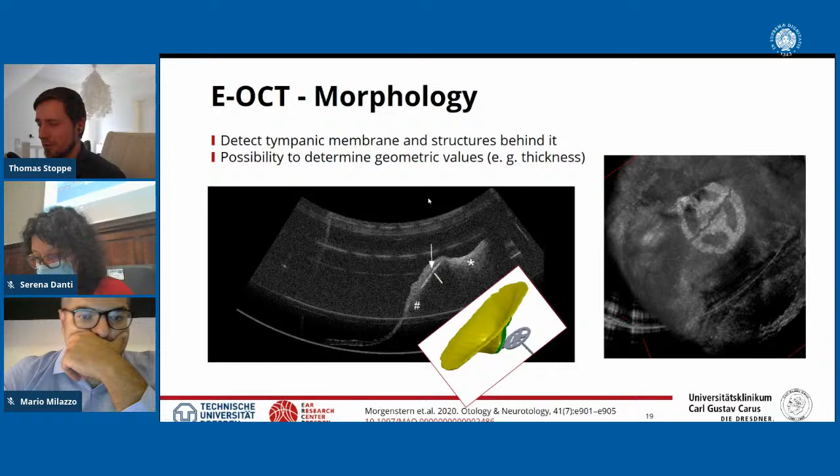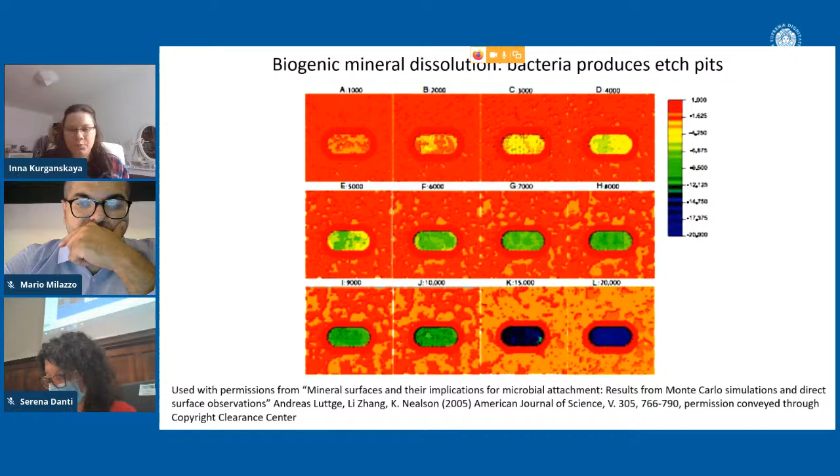It builds kind of a rim around the bacteria itself, and the surface underneath the bacteria dissolves quite intensely. The bacteria produce some acids, which facilitates dissolution. So it's kind of a new player, one more important environmental parameter in mineral-fluid interaction in the environment.

So this kind of mineral-fluid interaction can happen at different scales, as Francisco already said. It's a very complicated process to relate different scales, going from the atomistic molecular scale to the macroscopic world. So I work at the mesoscale, actually.

At the mesoscale, I'm trying to connect the effects happening at the atomic scale with the macroscopic world. So in this in-between place, I try to build reactive ensembles with realistic mineral surfaces and ions in the fluid, and see how they behave as a whole.

So the approach itself we call probabilistic, because it operates with probabilities, and in particular we simulate a sequence of reactive events on the surface, whose probabilities are calculated using environmental parameters plus crystal lattice parameters.

I simulate bond-breaking and bond-forming reactions. They are all activated processes. I need to know my activation barriers to calculate parameters correctly, and I need to know the saturation state and other environmental controls.

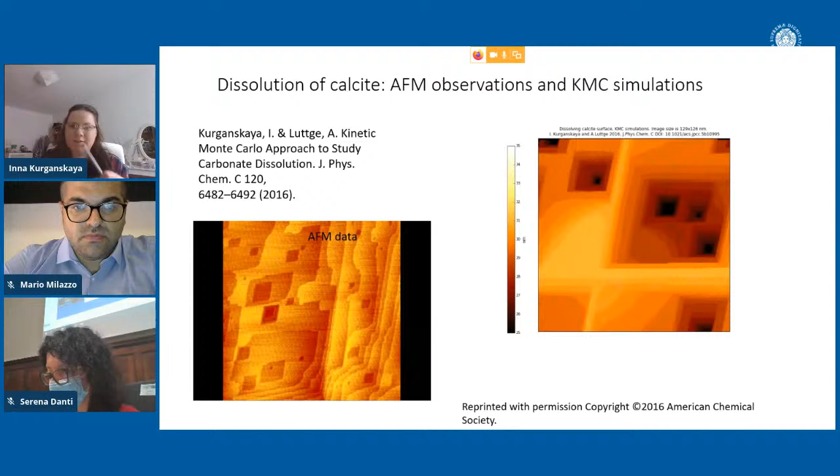I have some lattice defects, pretty much screw dislocations that go through the surface and work as sources of reactive steps on the surface. In this way, reactive surface area is generated and certain reactive sites are created.

Going a step further beyond structural controls, we also implement fluid controls, in particular ions in the fluid and charged surface groups, which are also very important for the kinetics.

So basically, I'm using for this kind of purpose a bit different approach, not kinetic Monte Carlo, which simulates system evolution in time and propagates from one surface configuration to the other. I simulate a reactive ensemble as a whole and generate a large number of possible combinations of surface and surface groups plus ions in the fluid to get the statistical behavior of this kind of system, and relate it further with the kinetic Monte Carlo models, with the kinetics. So this kind of equilibrium grand canonical Monte Carlo simulations dealing with statistical ensembles, plus kinetic Monte Carlo simulations dealing with the reactive events, are put together.

Right now I'm working with magnesium calcium carbonate solid solutions. This is an important biomineral of marine organisms. These kinds of materials are becoming much more interesting and complicated than pure phases. Why? Because when we add a different kind of cation into the system, we can generate a large possibility of arrangements for the surface bonds, and each carbonate ion can get a different coordination with respect to magnesium-CO3 bond and calcium-CO3 bond as well, and these two bonds have very different activation barriers or rates to break. So pure phases, pure calcite (calcium carbonate) and pure magnesite (magnesium carbonate), have 3 orders of magnitude difference in dissolution rates. So their behavior is very different.

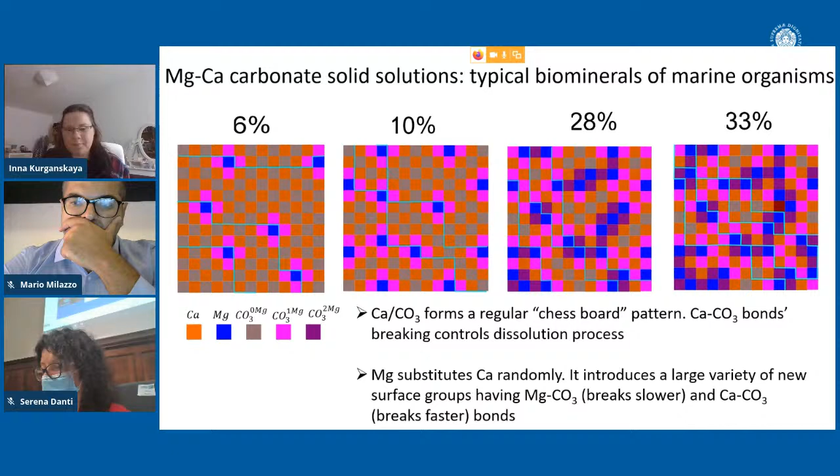And the first idea about dissolution behavior of solid solutions is pretty much about different rates of breaking for these bonds, but there is another important control which people became aware of. Since these cations have smaller size, they introduce lots of strain into the lattice. Experimental observations for growth of this kind of material showed that it cannot grow smoothly, actually. It forms sort of segments, and this segment arrangement and formation is controlled by the internal lattice strain. And related experimental observations pretty much showed that dissolution of these solid solutions is faster, and solubility is higher than pure phases. So why is it?

Pretty much, mismatch between the cation size causes displacement within the lattice, and the displacement causes strain. So the lattice is internally strained, and this strain induces excessive energy, which means the bonds are in general breaking faster than the pure phases. So if we introduce lots of substituting cation into the material, the entire lattice becomes strained. And in general, strain energy density can be calculated. I did it for calcium carbonate, and it can be calculated using strain tensors and other computational approaches, and all this information for the strain energy density comes into the equation for the dissolution rate.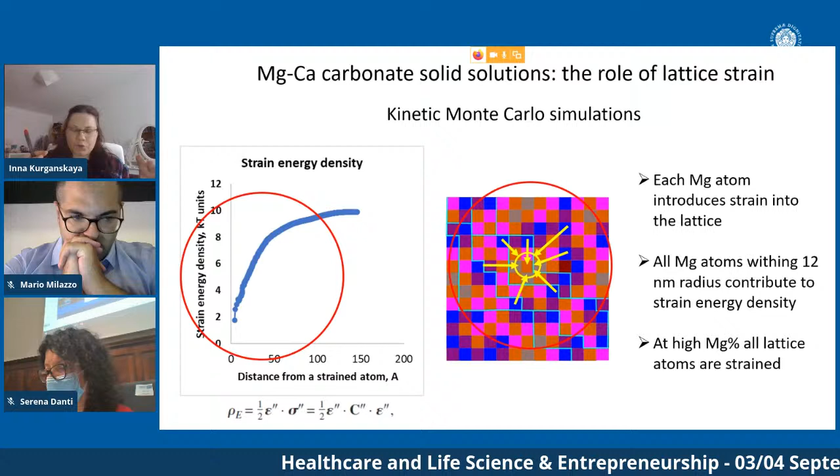So in this way, we can understand the role of the strain. For example, with solid solution materials, there are 20-40% surface morphology changes, also in a bit different way. And this contribution of the strain is substantial for every atom. Every atom is surrounded by a large number of strain centers, such as magnesium, and this effect for this material is actually very strong. It takes place within a 12 nanometer radius. So every atom is strained, and for every atom I have to calculate large strain tensors for the entire lattice. It's becoming computationally intense.

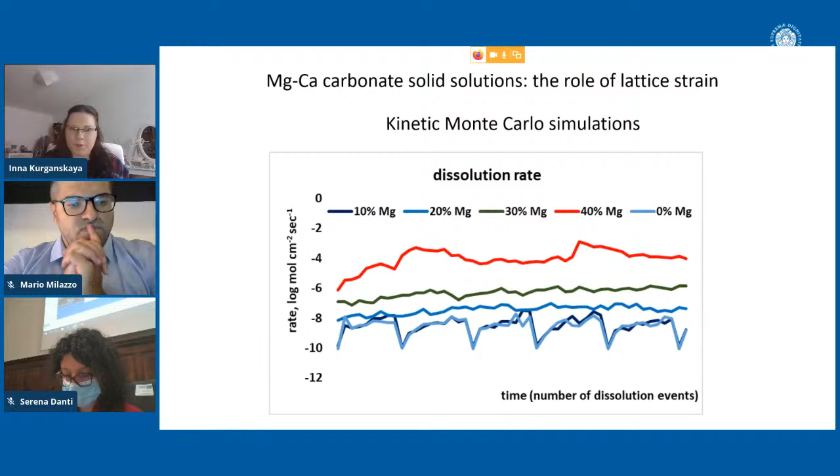So these are preliminary results for the dissolution rates. At this stage I took a small system and tried to understand how fast this mineral will dissolve if I dope it with different amounts of magnesium. The result is incredibly interesting. It showed that the material can dissolve up to 5 or 6 orders of magnitude higher versus the pure material itself. But if we add a small amount of magnesium, such as 5 or 10%, the rate is not really different. So in general, we know already that these materials are very reactive due to the strain. Biogenic carbonates typically contain up to 20% magnesium everywhere, which is quite interesting, and even up to 40% in some parts of the body.

So what are the evolutionary reasons for this kind of selectivity for the solid solutions? We know in general that they have enhanced elastic properties, so they're kind of more tense, and it's harder to destroy them mechanically, but chemically they are obviously easier to destroy. So what are the mechanisms of mineral retention in this case within these organisms? And another interesting problem, which I think is closely related to the problem of solid solution behavior, is human bone mineralization or resorption.

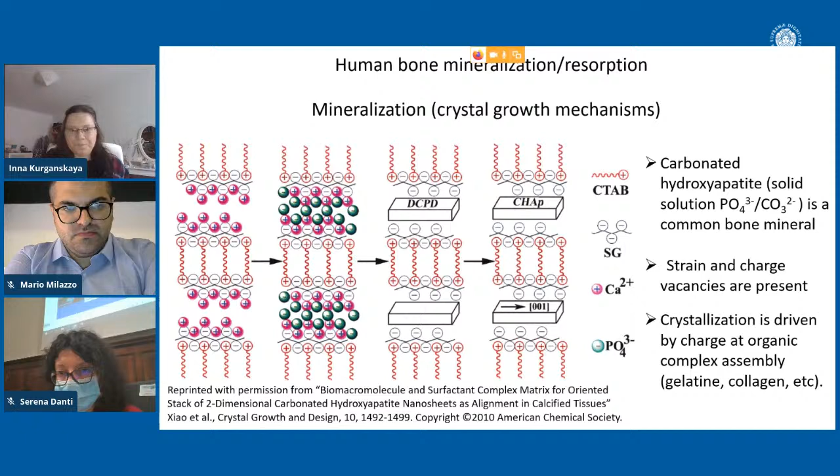The major mineral in human bones is hydroxyapatite, in particular carbonated hydroxyapatite. This means it's a solid solution again, but here the orthophosphate ion is substituted by a carbonate ion, and this change introduces some strain and definitely charge vacancies which are present. Crystallization in many experiments is shown to be driven by the surface charge. It's the organic complex assembly - whatever it is, gelatin, collagen - which basically generates some surface charge, and the surface charge electrostatically attracts the material, pretty much calcium and phosphate, and the material starts to grow. So these are interesting problems to explore in my case.

Generally, what are the molecular and mesoscale mechanisms for the growth of this kind of material? What is the role of strain and surface charge in how it grows or dissolves under their influence, and how can these synthetic materials be produced and how will they behave in vivo, in natural environments.

This kind of questions has some practical interest, but also is very interesting fundamentally. I think it will explain to us how these minerals can behave.

So in general, Monte Carlo methods can be used as a mesoscale model that can help us understand growth and dissolution of biominerals atom by atom, their reactive properties, and biologically controlled dissolution.

So next, I think we still have a big room to study the mechanisms of this kind of living organism and mineral interaction and the mechanisms of growth. We definitely need, for building a mesoscale model, some relevant key kinetic parameters and rates of these processes and key reactions. And it would be interesting to explore an area such as bioengineering for production of this kind of environmentally relevant nanomaterials.

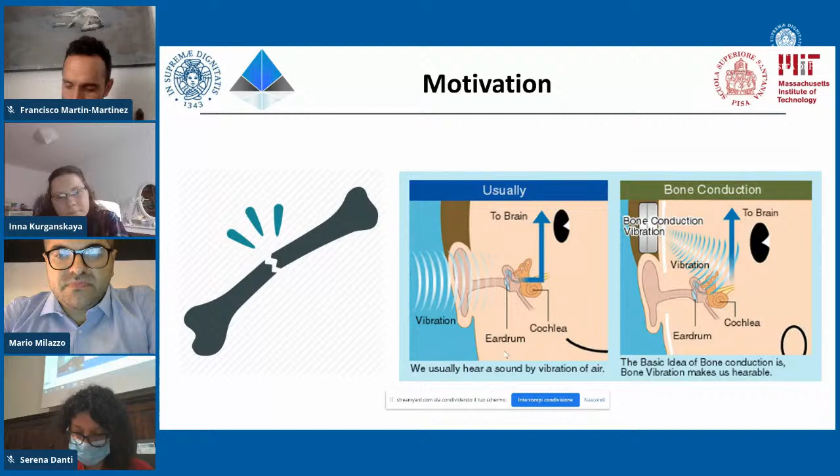They allow the transmission of the acoustic signal through the middle ear, but also because collagen is at the base of the bone. If we go into the deep and look at the atomistic scale of bone, we will find hydroxyapatite, but also collagen and water. So my question is: is there a way to better understand fracture or bone conduction—a different way to transmit acoustic signals to the brain—or to design new materials based on bone by understanding the viscoelastic properties of bone itself?

Because in this way, we can better understand physiology, but also design, let's say, super materials in which we can exploit the benefits of specific characteristics of the bone, while avoiding at the same time the disadvantages of the bone itself, creating therefore a better material than the physiological ones.

So starting from the beginning, my study started by studying collagen peptides—just taking into account little stripes of collagen peptides. We studied dry and hydrated structures with different loads in order to understand how hydration or loading directionality can affect the viscoelastic properties of the collagen.

So we studied two cases: modeling the collagen as a rod, in which we stress the rod with longitudinal impulsive waves, as you can see here; or modeling collagen as a string, where we pre-stress the collagen and then apply a transversal load, and you can see here the deformation like a string.

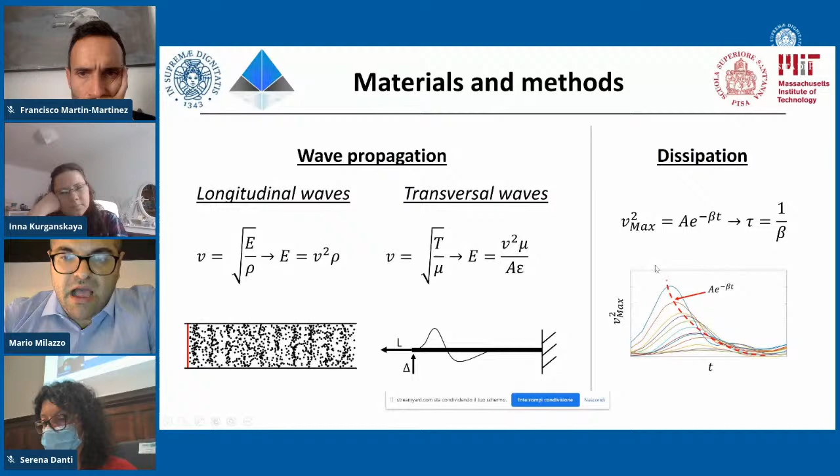At the same time, we can understand not only the transmission of the waves and of the energy, but also the dissipation of the energy. In this case, we study the square value of the velocity of the front wave in order to understand how fast waves are dissipated through the structure.

Specifically, we can see that the velocity of the waves through the dry structure is much faster—about 300 meters per second—corresponding to a high Young's modulus. For the hydrated structure, interestingly, we see a relatively slow velocity, and a less stiff material with a lower Young's modulus.

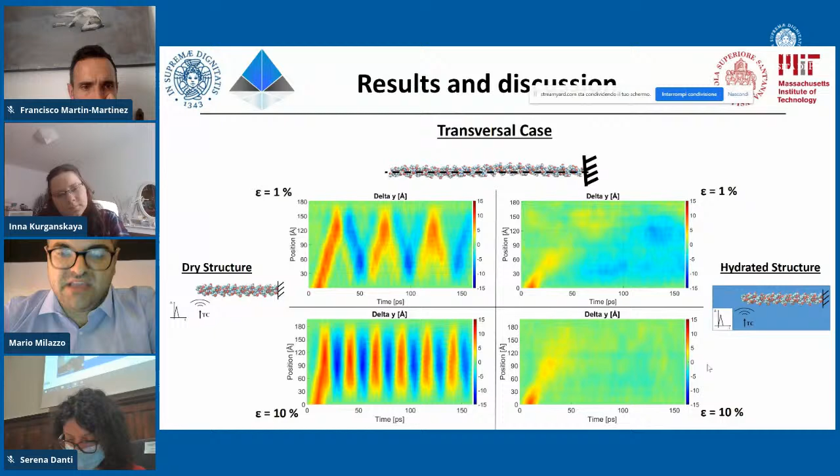But let's increase now the complexity of the model. I showed you just collagen by itself. Now let's see collagen that is mineralized.

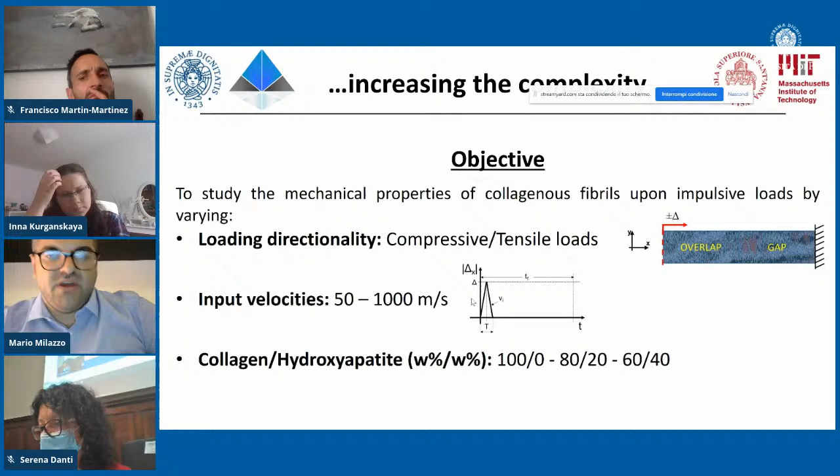And in order also to understand if a different velocity, a faster input velocity or a slower input velocity, can change the behavior of the material itself.

And here, before showing you all the plots, here's a nice video in which I can show you qualitatively—because of course waves are not sinusoidal, but it's just a qualitative simulation of what's going on—that there's a traveling wave starting from where the load is applied, and when the wave hits the interface between the two regions, the overlap and the gap region, we have a reflection of the wave.

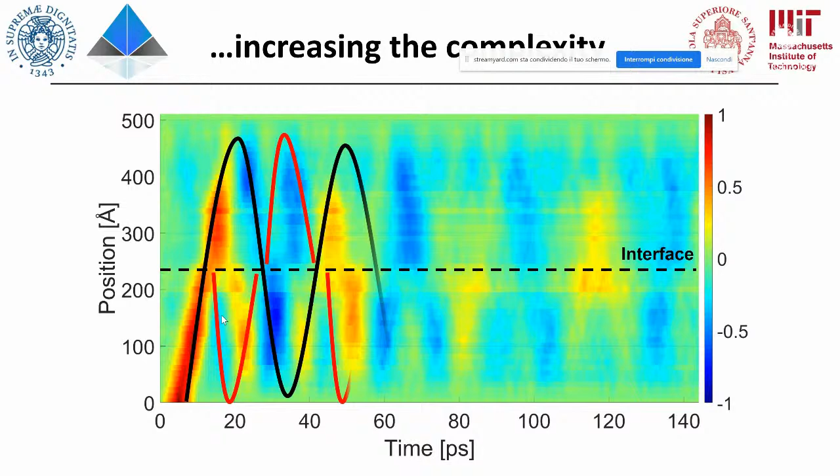I can show you again. There's a reflection of the wave that creates a simultaneous rebound of the waves. This is really interesting because you can see it in both the compressive load cases and the tensile load cases.

You can see that the plots are somehow similar, but somehow different. First of all, we can see that increasing the input velocity for both compressive loads and tensile loads, we have an increase of the dissipative behavior. And this is something that we will see later mathematically also.

And this is also really connected to the macro scale and how bone works, because if we hit our bones with very fast loads, bone structures are able to dissipate energy very fast, avoiding any damage to the structure itself.

Then another nice thing to see is the change of slope between the overlap and the gap region, and we can see it better here. Therefore, we can understand separately the velocity of the waves in the overlap and in the gap region, and we can model the wave transmission in both regions separately. This is, up to our knowledge, the first study in which scientists did this.

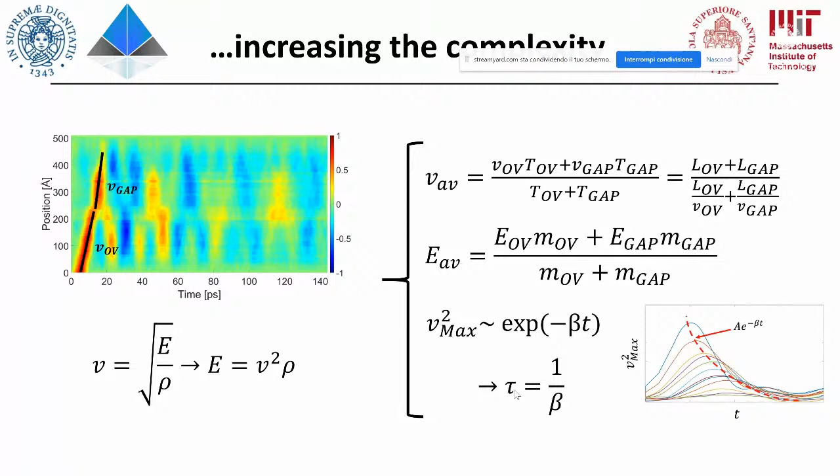General plots in order to understand how the material works upon impulsive loads. So what we can see is this: increasing the input velocity, we have a decrease of the wave speed and a decrease of the Young's modulus.

This is an apparent contrast with other simulations done on single peptides, in which if we are stressing with impulsive loads, we are increasing the Young's modulus. But in this case, we are not considering only a single peptide, but a complex topology in which multiple peptides are connected through hydrogen bonds, and those hydrogen bonds play a significant role in transmitting energy and dissipating energy also.

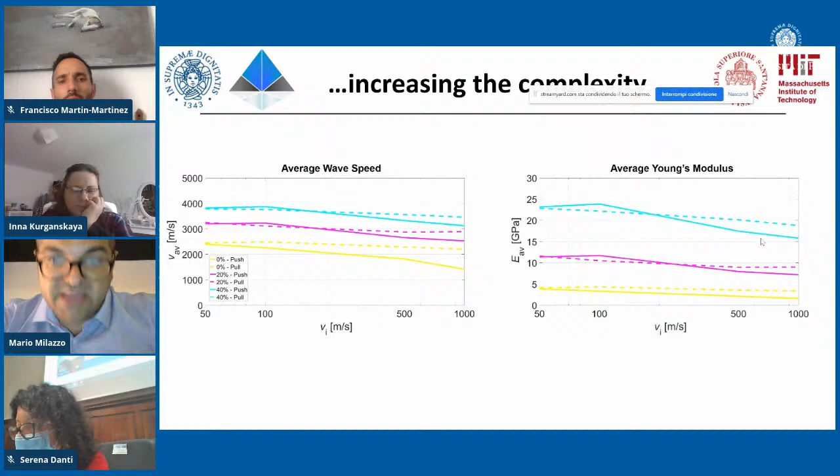The last step I want to show you is adding the last component of mineralized fibrils that compose bone. So we are adding water, ionized water, to the voids of the 0% hydroxyapatite material, which has only collagen, so it's pure collagen. But we are also adding water to the 20% hydroxyapatite material, which has 80% collagen and 20% hydroxyapatite.

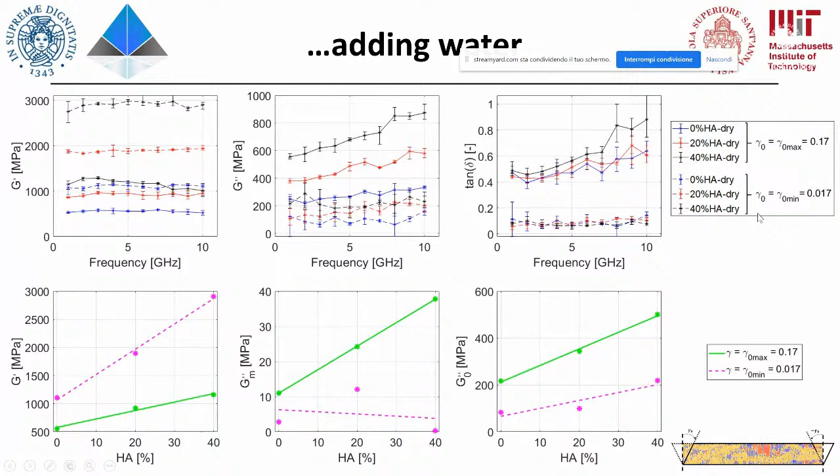We show with the solid lines the behavior of the material with the highest angular deformation, and with the other lines the smaller angular deformation. In both cases, we can see that increasing the percentage of mineral increases the elastic behavior of the material itself — of course, the material is getting stiffer.

The very interesting part is related to the viscous behavior of the material, because it doesn't show any specific trend with the lowest angular deformation. This is summarized by this line, which is a statistical manipulation of the data — we can see we don't have any trend there. But we do see a specific trend for the viscous behavior against the highest angular deformation, especially after 5 gigahertz, and it's quite linear, represented here by this green line. The same behavior is emphasized in the tan delta, visible in this last plot.

Now, adding water, what happened? What happened when we added water to the compound, since before we only saw results for the dry fibrils? Adding water, we are not seeing any specific change for the elastic component, besides a progressive saturation below 3 gigahertz. Instead, the viscous behavior is significantly affected, and you can see that especially at high frequencies we can reach very high values.

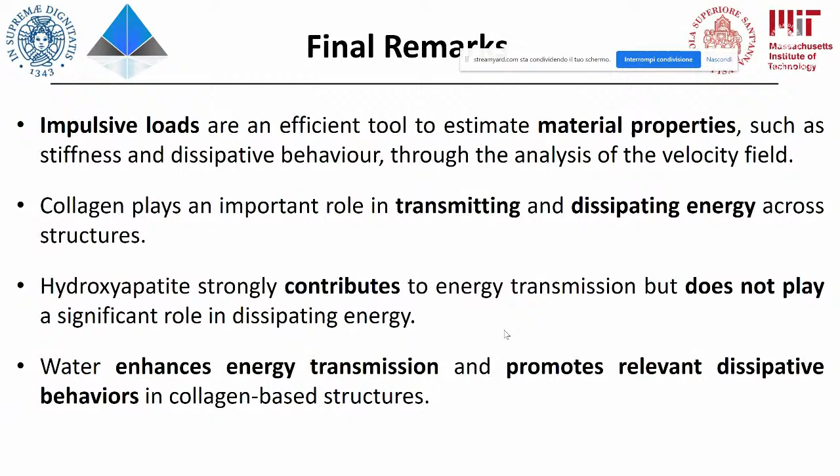The second thing is collagen plays a very important role in transmitting and dissipating energy across structures. Collagen is the main actor in dissipating energy, especially because when we are speaking about mineralized fibrils, hydroxyapatite is a very stiff material, so collagen is the one playing the main role, together with water that is promoting the dissipative behavior, enhancing the behavior persistently promoted by collagen. Hydroxyapatite contributes to energy transmission since it is a stiff material, giving a boost to energy transmission, but doesn't play a significant role in dissipating energy.